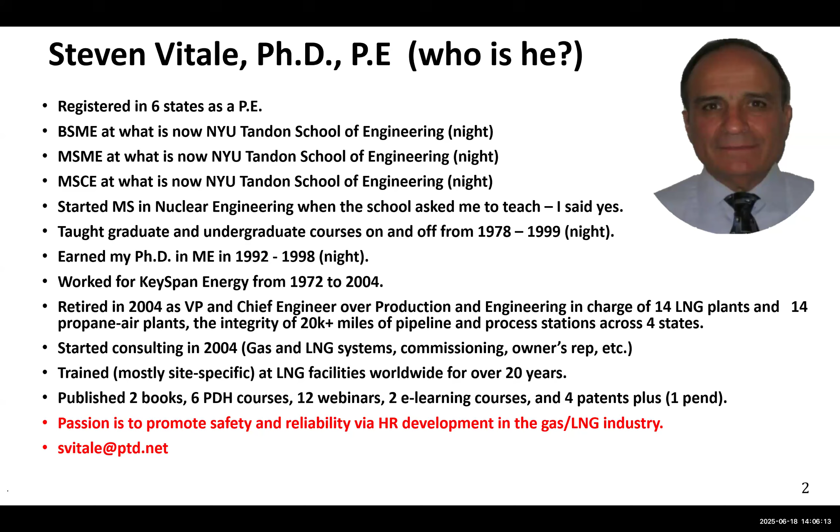And if you think about it, there was no real hazard. Even if it caught fire, there's nobody in the trench, and we have a big fire. You make an opening away from the trench, shut off the gas supply, the fire goes out. So my key in this presentation will have a string of safety requirements as I go through it.

Let's talk about LNG. Why do we want to know about LNG? What is it? It's liquefied natural gas. How do I make LNG?

Let's say I have a container that has natural gas in it, and I chill it down. As I chill it down, it gets more and more dense, and eventually becomes a liquid. But there's a problem with just doing that, because some things will freeze up on your heat exchangers, like CO2, water vapor, H2S, and heavy hydrocarbons. So you have to clean it up. That's called pretreatment. You clean up the natural gas and then you can refrigerate it.

How do you refrigerate it? The same way you do air conditioning, using a refrigeration process. Can you do it in a single refrigeration process? Not really, because you have to go from ambient temperature all the way down to minus 260 degrees Fahrenheit, approximately minus 160 C.

We'll talk about liquefaction systems and LNG tanks. LNG tanks are nothing more than highly insulated tanks. We'll talk about valves, pumps, vaporizers, and other equipment. Bog is something you'll hear me talk about quite regularly.

Bog is boil off gas, and bog happens continuously. Why? Because we're not continuously refrigerating the LNG, and heat is always leaking into your LNG tank. So the LNG tank is continuously boiling off.

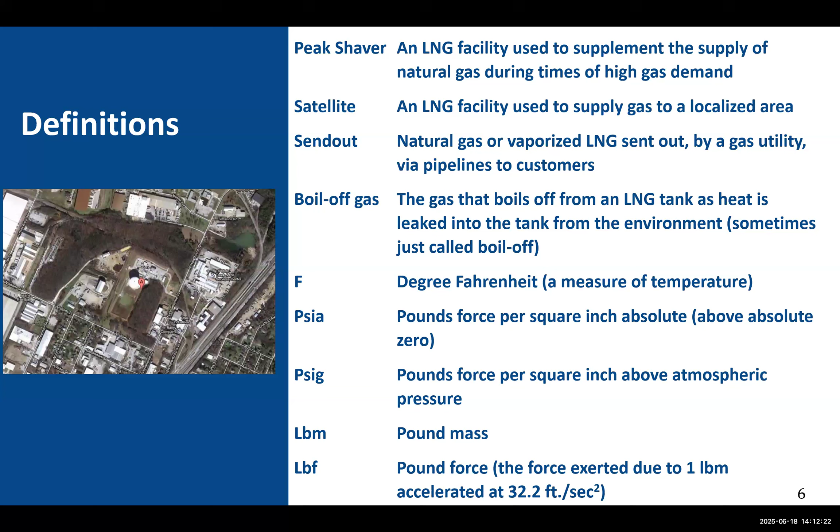When I step on a scale, though, it pushes down on the scale with 174 pounds force, not mass. Because if I step on the scale in outer space, I read 0 force. If I step on the scale on the moon, it's about 1/6, so I'd be a little bit less than 30 pounds if I stepped on the scale on the moon. So you can see the difference between pounds mass and pounds force.

In the gas industry, we talk about a standard cubic foot. A standard cubic foot sounds like a volume measurement, but in reality it's a mass measurement. Why? Because if I give you a cubic foot, you can't tell me how many molecules are in it. But if I give you a cubic foot and tell you two intensive properties of what's inside of it—an intensive property being a property of the fluid that does not change when you change the volume—so if I tell you two intensive properties like pressure and temperature, I can now define how many molecules are in that cubic foot. So a standard cubic foot of natural gas is so many molecules of it, and you can calculate it out.

And why do I know that? Because of standard temperature and pressure. But I caution you, everybody measures standard pressure and temperature differently. If you go to a college or university, well now they'll teach it in SI terms, but in the gas industry, in the United States anyway, they tend to stay with the English terms. So 14.73 and 60 degrees Fahrenheit is STP, standard temperature and pressure, in accordance with the American Gas Association.

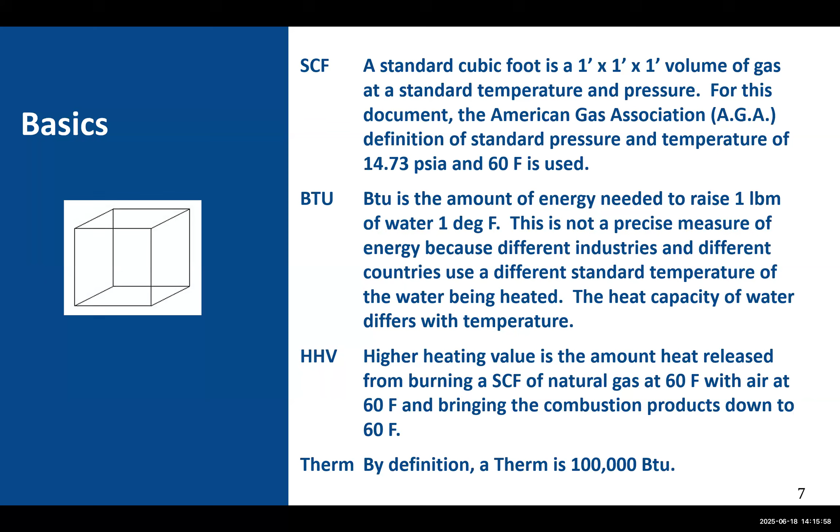By definition, a therm is 100,000 BTUs. Now, the gas industry is a bit of an oddball in its measurements. We use a decatherm, but it's spelled D-E-K-A, while everyone else uses deca, D-E-C-A. So you'd say decameter or decaliter, but in the gas industry we use DEKA, a decatherm. The difference is one is derived from the Greek and one from the Latin. I believe DEKA is from the Latin and DECA is from the Greek—I'd have to check which one is which.

The other oddity about the gas industry and its measurements is that every other industry uses K to mean 1,000, but not in the gas industry. In the gas industry, we use M to mean 1,000. So if I said 1,000 decatherm, it's an MDTH. Or if I said 1,000 standard cubic foot, it's an MSCF, 1,000 standard cubic foot. Now, many people in other industries use M to mean 1,000,000, but in the gas industry, it's 1,000.

So how do we say 1,000,000 standard cubic foot? It's an MMSCF. Kind of strange, but that's the way it is. A BCF is where we change to normal nomenclature. We call it a B standard cubic foot, so it's a billion. A gallon is an imperial unit, about 7.48 gallons in a cubic foot.

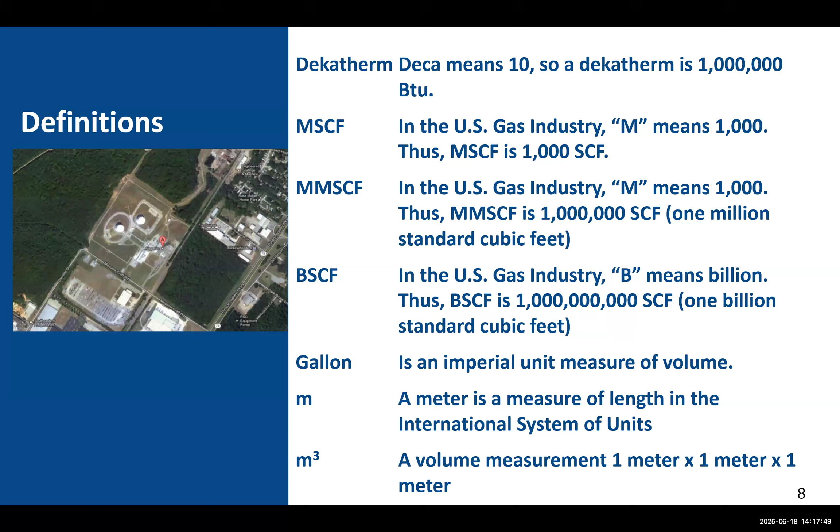Another type of measure we use, especially in transporting LNG, is a cubic meter. Then there's a normal cubic meter, very similar to a standard cubic foot, at normal temperature and pressure. Then there's a barrel. There's two types: a wine barrel, which is 32 gallons, and a petrochemical barrel, which is what we use in the LNG industry, and that's 42 gallons.

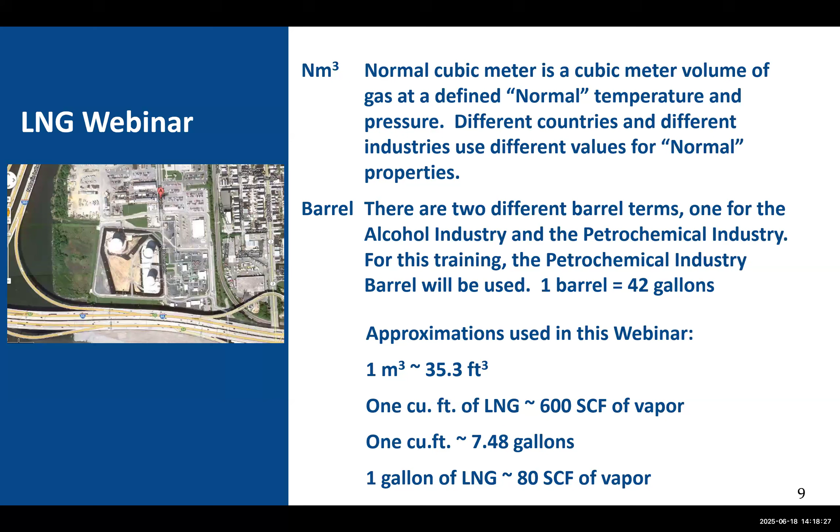So if I said I had an LNG tank that was 1,000,000 barrels, that's 3.3 billion standard cubic feet, or 42 million gallons. Then here's some approximations that you might want to keep in the back of your head, or keep as a reference. I put them there.

We manage a lot of energy. Let me give you, for instance, most LNG tanks are in the order of magnitude size of a 1 BCF. Now, import and export terminals may have 3 or 4 BCF per tank, big tanks. But most of the peak shavers, and I'll explain what a peak shaver is, use about a 1 BCF tank.

Well, that's about enough fuel to heat your house 24 hours a day, 7 days a week, for about 1,000 years. It's enough energy for you to drive your car around the world 6,600 times.

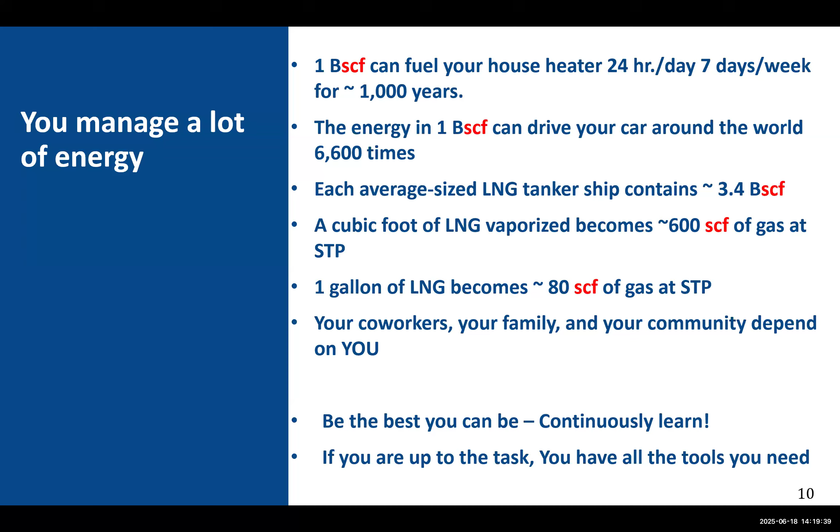Each average size LNG tank, as I just mentioned, is 1 BCF. An average LNG tanker ship carries 3.4 BCF. A cubic foot of LNG, when you vaporize it, grows to be 600 standard cubic foot of vapor. 1 gallon of LNG is about 80 standard cubic foot of vapor at STP. You and your coworkers deal with one heck of a lot of energy.

So I mentioned the word peak shaver. And what's a peak shaver? Well, let's say we live in the Northeast, and many of you are from New York. So let's say you live in New York. Where does the gas come to you from? It comes from Texas, mostly Texas and Louisiana, and about 20% of it comes from Canada.

You may not realize it, but the gas you actually see may be all from Pennsylvania. Even though it's coming from Texas and Louisiana, and you're buying it there, it's stored in Pennsylvania and shipped during cold weather. So the whole natural gas grid is a grid that everybody's inputting into and other people are taking off of. Whose molecule you're actually getting doesn't really matter.

Down in Texas, they may put in 300 million molecules. Up in Canada, so many. You are pulling off of this grid. You may have a contract with a company in Texas, but in reality it doesn't matter. You're just taking off the grid, I call it the grid, but it's really pipelines.

But what happens on the really cold days, like when it's 0 degrees outside, you can't push enough gas through that pipeline. So you have storage facilities, which are essentially underground storage capabilities that allow you to pump gas in during the summer and then take it out during the winter when you need it.

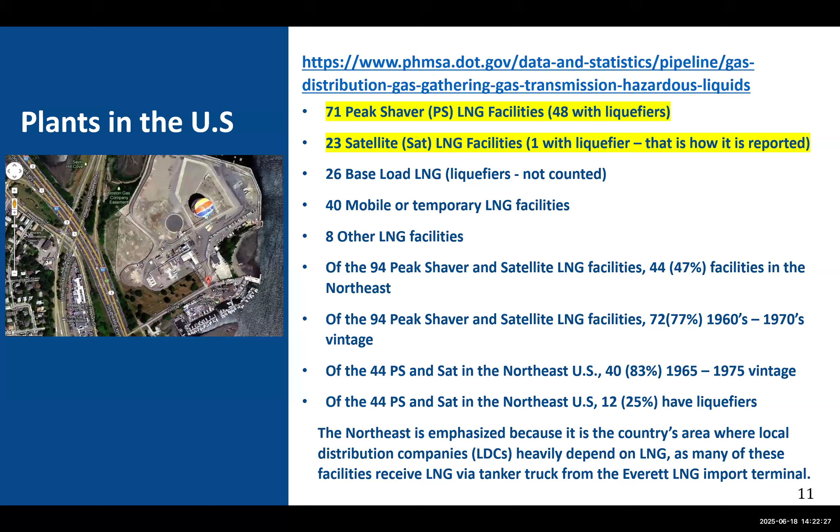A satellite facility would not have a liquefier. You can see there are 23 satellite facilities, yet one of them is listed as having a liquefier, so that technically would not be classified as a satellite facility by definition. But this is actual data reported by the companies to PHMSA, and PHMSA has this data available. The link I left you allows you to go onto the PHMSA site and download this information.

I'm not moving fast enough, so let me get myself in higher gear. Where does gas come from? The easy gas comes from conventional gas wells, where there are pockets of gas underground.

Then there are conventional associated gas wells. This is a gas well that has both oil and gas in it, and you have to separate them. In the beginning of the industry, they were always looking for oil. Gas, nobody sold gas. It was a nuisance to the oil drillers. They would drill, hit gas, burn it off, and get down to the oil.

But now, around the 1950s or very early 50s, pipelines were spread from Texas and Louisiana up the east and west coast, and all of a sudden, natural gas became available to places like Baltimore, New York, Boston, etc. And since then, those pipelines have been expanded, and the sale of natural gas has become a massive industry.

In fact, about a third of the energy used is natural gas, and we're converting many of the oil and coal-fired electric generating stations to natural gas. So demand for natural gas has increased, so much so that new technologies have been used. One of those technologies is directional drilling.

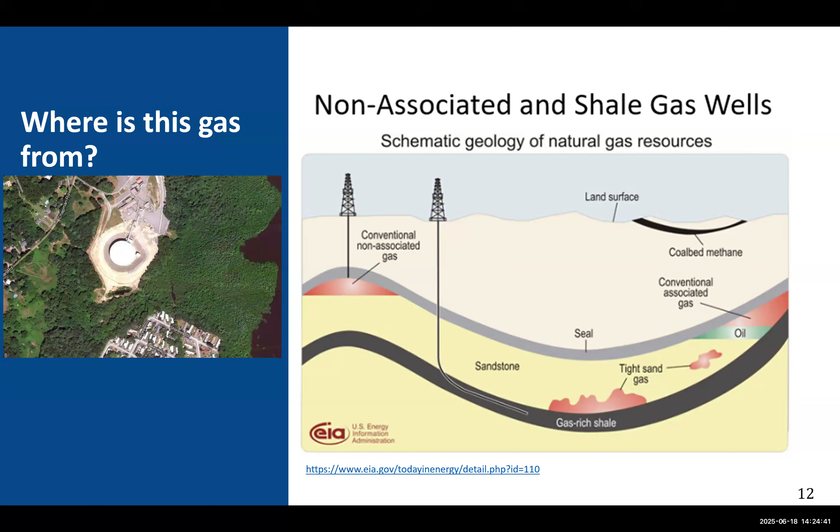There are tremendous amounts of gas hydrates under the ocean. They don't know how to extract that yet, but I'm just saying there's plenty of gas.

How do you frack a well? Typically, here's a well site, and there'll be 6 pipes coming down, spread out, 3 in this direction, 3 in the other direction. Then they will block it off and explode pellets or bullets through the piping, which puts holes in the piping. Then it pumps down very high pressure water, which fracks the shale. Fracking means cracking the shale.

And in that water are sand particles, which keep the cracks open, so that when you extract the water, the gas in the shale follows it and comes up. First you get the water out, then you start getting gas, and it keeps coming and coming. I've been on a couple of these shale sites, and they're amazed at how much gas comes out of the shale. It just keeps on coming.

So this has been a revolutionary technology. How does gas transport? Typically through pipelines. This is an EIA map of the major pipeline network in the United States, showing transmission piping. There's about 300,000 miles of transmission piping and about 1.3 million miles of distribution piping.

Distribution piping is the pipe outside the front of your house that delivers gas to your house. Transmission piping is the high pressure piping that takes the gas from the production centers up to the high use centers, or what we call the load centers, like New York, Boston, Baltimore, etc.

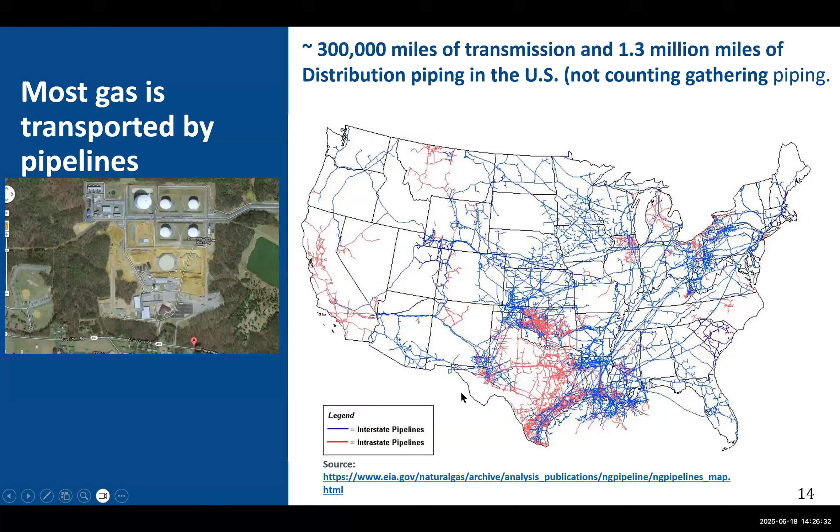LNG is nothing more than natural gas that has had its contaminants taken out and then chilled, and it becomes about 1/600th of the size. That's why it's stored as LNG, because it's a very dense concentration of energy. When is LNG used?

It's used when there's not enough gas coming up the pipeline, and you now have to supplement the pipeline supply with vaporized LNG. How do you vaporize LNG? Take the LNG, add heat, it turns back into a vapor, continue heating it till it's around 40 degrees Fahrenheit, and then you put it into the pipelines, and it goes out to the customers.

Customers don't see any difference between natural gas and LNG. The only thing that happens, though, is when you liquefy it, you're actually taking the odorant, the smell, out of the gas. So you have to put odorant back into the gas. When is it used? When there's not enough gas coming up the pipeline.

Also, when you want to take stranded gas - let's say I have this great gas supply in Alaska, and you want to get it to some other country. Well, how do you get it there? You put it on ships. In fact, the first LNG export facility in the United States is in Kenai, Alaska, and it was built to take LNG from Alaska and ship it to the Pacific Rim countries.

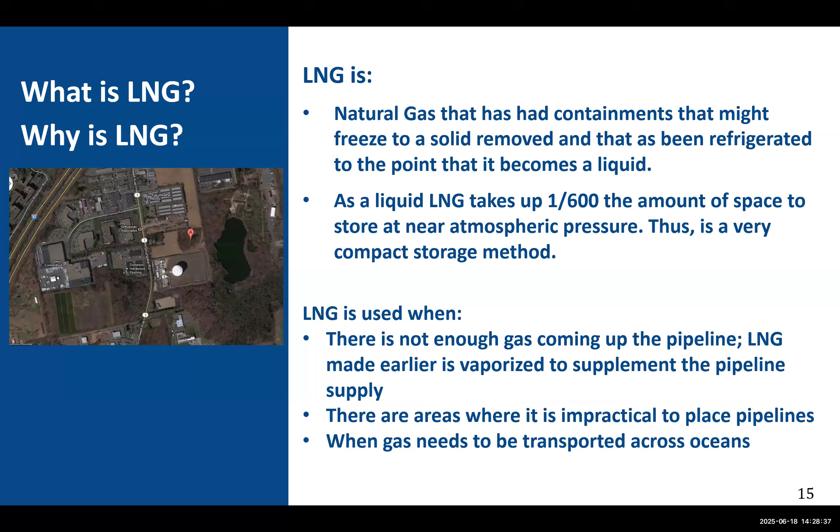I'll call them the Pacific Rim countries that need natural gas. Japan, for instance, a major industrial country, has no indigenous natural gas. They import every drop of natural gas in the form of LNG. LNG is used when there's not enough gas, and also when you have to move stranded gas to other locations.

What is a major component of LNG? What are the major components of natural gas? The major components are methane, typically over 90%, ethane 3 to 8%, propane around 1%, even some nitrogen. Typically natural gas will have a little bit, maybe up to 1 to 2% nitrogen. LNG will typically have some nitrogen liquefied when you first make it, but after a couple of months, all of that nitrogen has boiled off preferentially.

So it's flammable. If I took 1 cubic foot of LNG, it would produce about 630,000 BTUs of energy when burned. Think of it this way: a cubic foot of natural gas is about 1,030 BTUs of energy when burned, and 1 cubic foot of LNG makes 600 cubic feet of vapor. That's where I get this 600 to 630... 1 cubic foot makes 1,030, 600 cubic feet makes 630,000 BTUs of energy. It's about a 600 to 1 ratio, essentially.

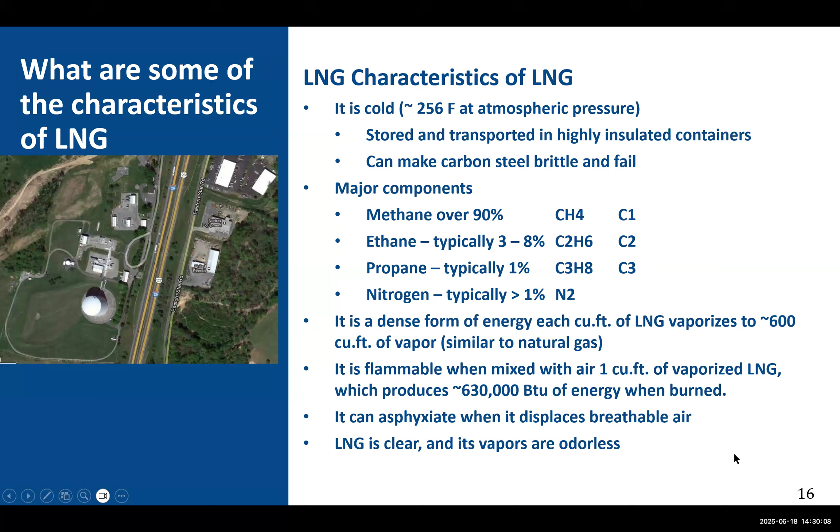LNG is odorless, so you have to watch out. Nitrogen is odorless too, so you have to watch out. I say that intentionally because if you're in an environment with low oxygen concentration, you will pass out, and if it's low enough, you will die. I remember interviewing people who were overcome by a nitrogen gas environment, the 5 people who survived that accident. Many of them said they pulled their shirt up over their face and went in to help their fellow workers who had fallen. Originally 2 workers fell, 2 others jumped in, pulling their shirts up. But pulling your shirt over your face in an oxygen deficient environment does nothing. That's a myth people don't realize.

There are a couple of other myths, and that is that LNG vapor is nothing more than natural gas, and since natural gas is lighter than air, LNG vapors will rise up into the atmosphere. I've heard many PR people from the gas industry say that. It's not true. Here's why: the LNG vapor is so cold that it's dense—actually denser than air.

It's minus 260 degrees Fahrenheit when it boils off. So you have the liquid at minus 260, the vapor at minus 260, and as the vapor travels, it hugs the ground until it warms up. When it gets to be around minus 150 degrees Fahrenheit, it's just about buoyant with air. Then as it warms up more, it becomes buoyant with air.

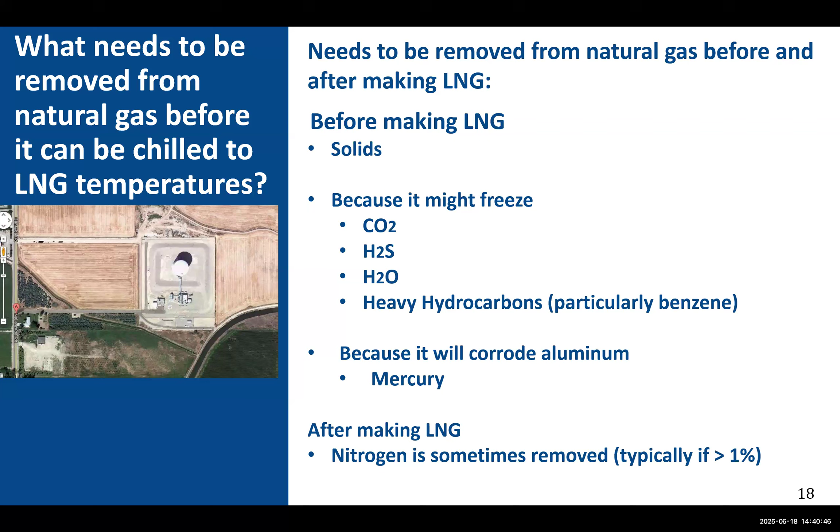But if I put a drop of mercury on an aluminum plate and then have this presentation, by the end of the presentation, I could show you that drop of mercury has corroded a big gouge in that piece of aluminum. So you've got to take out the mercury as well. LNG vapor and combustible mixtures—we're going to talk about that next.

Now, this is an AI screenshot. I want to put that there because I didn't have—go back one—I do have an actual picture behind me, but it's not one that I had rights to, so I just put up an AI picture. It just shows that LNG, when it vaporizes, you see a white cloud.

Now, what is the color of the vapor? It's not white, it's clear, you see right through it. What are you seeing when you see a cloud from a vapor cloud that comes off of LNG? You're seeing the water that's in the air condensed. So what you're really seeing is condensed water vapor in the air. The actual cloud of vapor is odorless and invisible, but because it's so cold, you get to see this cloud of water vapor. The cloud hugs the ground—that's the important thing to remember.

Now, in an LNG plant, you always look at the windsock to see which way the wind is going, because all of the theoretical work that's done is based on certain wind conditions, and you'll see what's called isopleth. Isopleth is a plotting of radiation heat transfer, and I'll show you a couple of those. But you don't want to be downwind of a gas leak or downwind of an LNG spill—you want to be upwind of it, and I'll show you why momentarily.

So let's say we did an isopleth for this spill. Well, it would show you a circle that says, okay, if you're anywhere within this range, you're safe, but not if you're here, really. So you've got to know your wind when you're in an LNG facility.

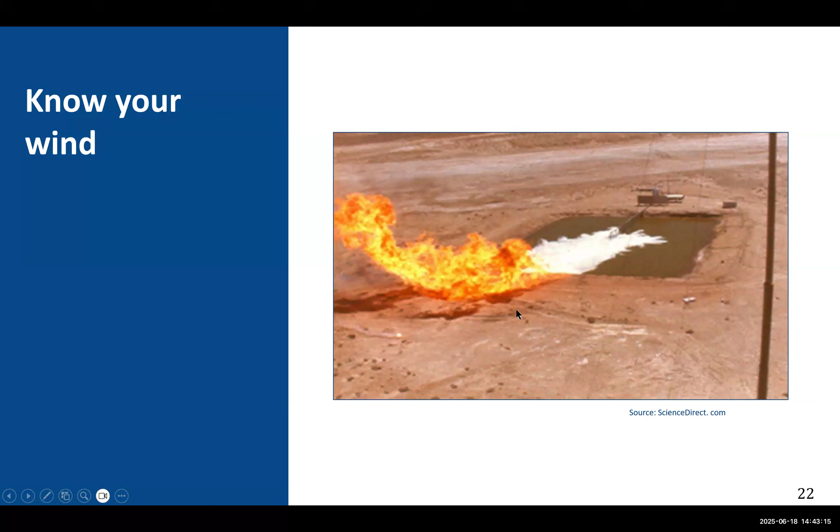And I know one person who was doing an experiment, and he was downwind, and the flame was over his head, and he said, 'Wow, I've got to rethink the experiment that I'm doing.' So you could see how knowing your wind becomes extremely important. Always keep your eye on that windsock when you're in an LNG facility.

Vapor and flame characteristics. Now, if a vapor cloud goes all the way out over here and gets ignited, you'll see the vapor cloud get ignited here, and then the flame move on back until it's right over the pool. That's a deflagration—it means it's a slow burning flame front that starts at one point and then carries its way back to its source of LNG.

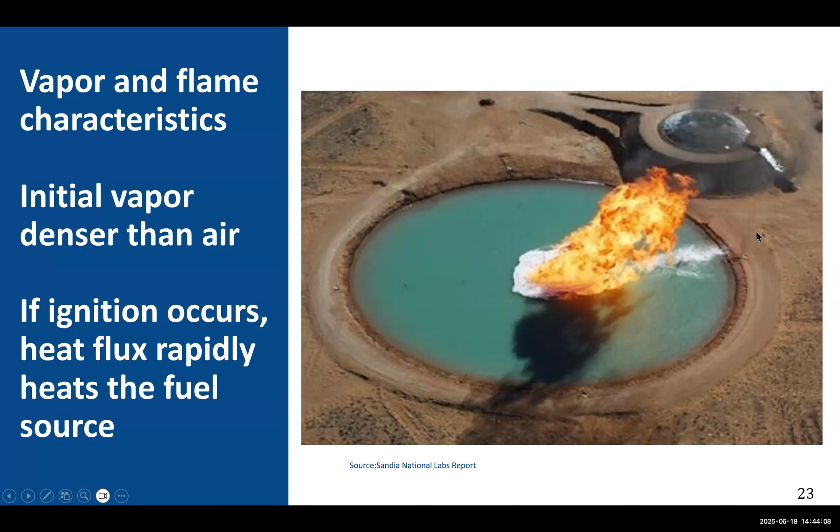And you can actually have, if the wind is strong enough, the flame over here, and if the wind is, let's say, the same velocity as your laminar flame speed, you'll have a flame over here and a vapor cloud over here. Your flame will be staying behind. So you know your wind direction. A lot of what we do in the gas industry is purging out things to be safe.

If you get enough oxygen out of a vessel, and there's very little oxygen left with some gas in it, you strike a match and nothing happens—no explosion. So you do purging, and there are ways to do it. The most convenient way is, if I have to get this vessel emptied of whatever's in it, I move this and get it emptied out.

If I put a liquid in, I'm going to do a displacement purge and get all the vapor out. But you can't really do that with LNG, because water will stay behind, or water vapor will be left that crystallizes within your LNG. So we have to use a gas—typically nitrogen—for purging.

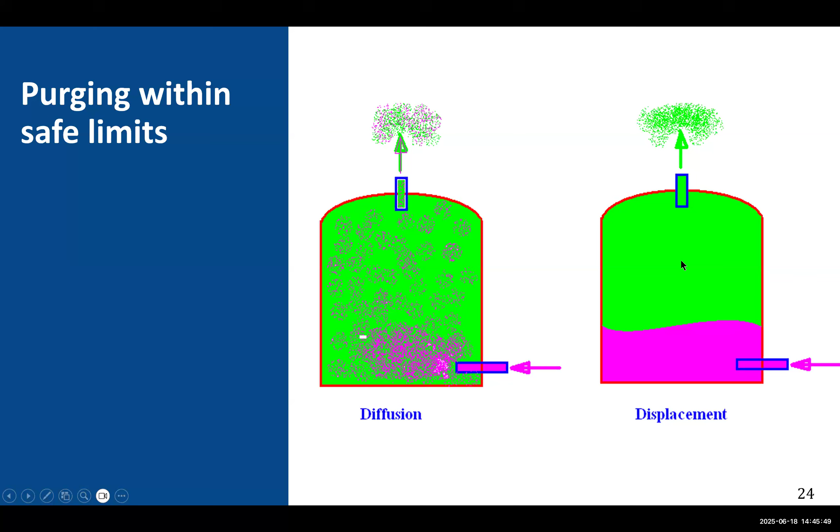It's a lot harder to purge with nitrogen because you have to depend a lot on diffusion. You can trick the natural gas by making the nitrogen cold, but you have to be careful not to make it so cold that any water vapor in the air drops out as liquid. So you want to first use warm nitrogen. Once you get a layer of nitrogen, you can start bringing in cold nitrogen to try to get a displacement purge. What you want to avoid is channeling.

Channeling is when you take a reading up here and say, 'Hey, I got all the air and gas out of my vessel, and I'm ready to bring in my other component.' Let's say the vessel was filled with air, and since I just constructed it, I want to now bring in natural gas. Before that, I push nitrogen through here. I take a measurement and say, 'Okay, I'm coming out at 95% nitrogen—good, I'm all purged out.'

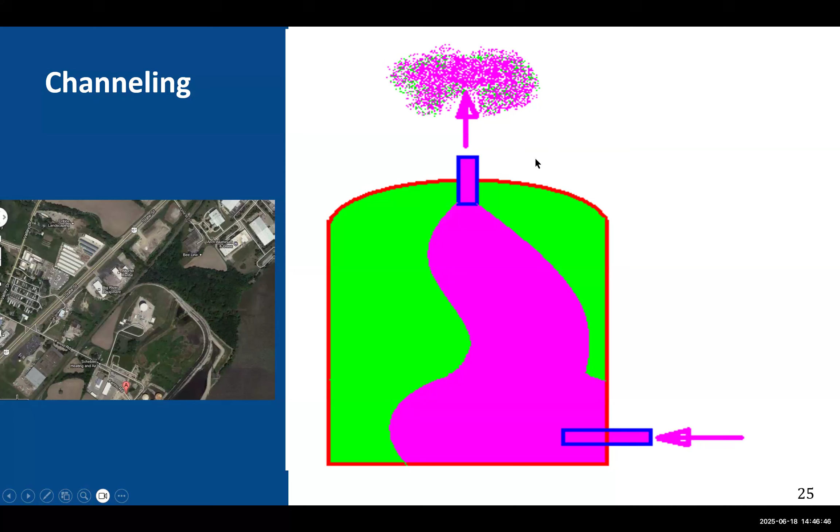In reality, over here you might have 10% oxygen, and here only 5% oxygen—you think you're fine. But over here you might have 12 or 13% oxygen. So what you do is stop your purge, wait for diffusion to take place, then restart your purge and recheck your composition.

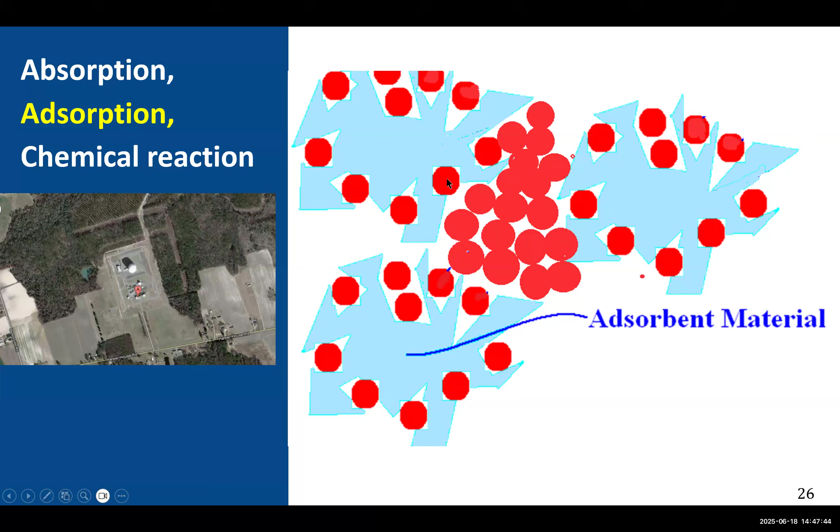One of the problems is that perlite, one of the insulators we use in insulating the tank, acts as an adsorbent, meaning it has many small crevices. Adsorbents are used intentionally to remove water vapor from gas molecules. Perlite isn't intended to be an adsorbent, but it's a very good insulator—it tends to capture gas molecules within its crevices, because perlite is just solid material that's heated and popcorned apart into a fine powder. But that powder has crevices that can adsorb natural gas. So if you purge out a vessel or insulation area filled with perlite, you have to be careful because you're really not getting all the gas molecules out.

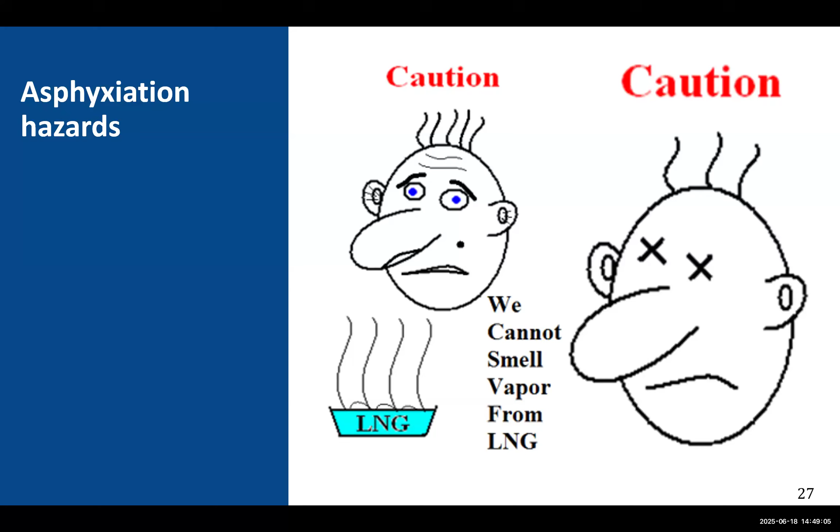But keep in mind: your lungs are nothing more than a big semi-permeable membrane with a lot of surface area, allowing oxygen to go from the high concentration side to the low concentration side. So if you take in a breathful of nitrogen, what happens is not just that your hemoglobin stops getting oxygen—worse, the oxygen already in your hemoglobin will leave it and go into that nitrogen. So you can actually have an instant collapse from nitrogen or natural gas.

In 1979, liquid natural gas seeped through a seal in a pump. A pump is essentially a can that has LNG in it with a submerged pump and a wire coming out. There's a seal to prevent the LNG from going past the wire, and that wire then goes to your motor control center. The LNG seeped past the seal and went into the motor control center.

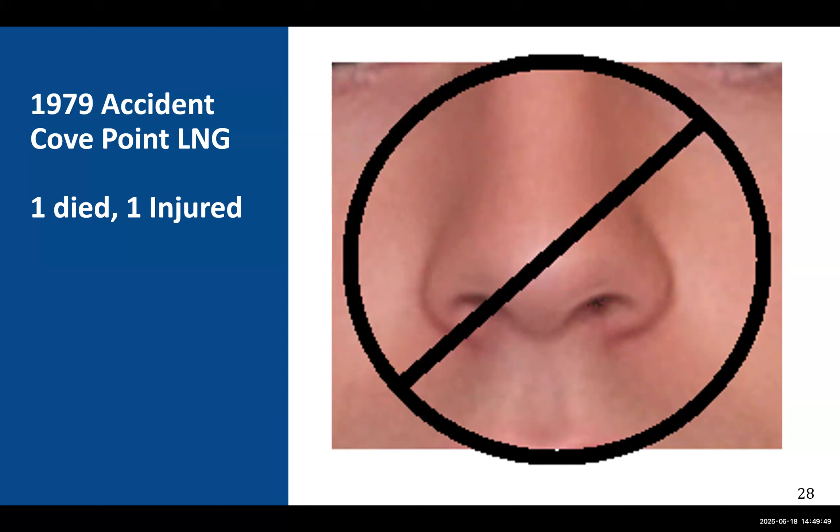And because it's odorless, remember LNG has no odor, the operators didn't smell the boil-off vapor, and there was an explosion. One person died, and one was injured.

Now, talking about oxygen concentration, the air that we breathe is 21% oxygen. If you have excess oxygen, you can have a fire take place very rapidly. That happened in one of the space capsules where three astronauts were killed. They had a very high oxygen concentration in the capsule. A spark started, and the insulation burned very rapidly.

I remember one time as a stupid kid putting a cigarette into a stream of oxygen, and I went like that, and the cigarette literally just exploded. It was incredible, but stupid kids do stupid things.

On a loss of oxygen, if it's not all the way down, you start getting a decrease in motor skills, but worse than that, you have poor cognitive abilities, and you can make really wrong decisions and not even realize you're making wrong decisions. So you have to watch the oxygen content whenever you're in a confined space or whenever there's a possibility that you're in an area that has less than 21% oxygen. The minimum allowed by OSHA is 19.5%.

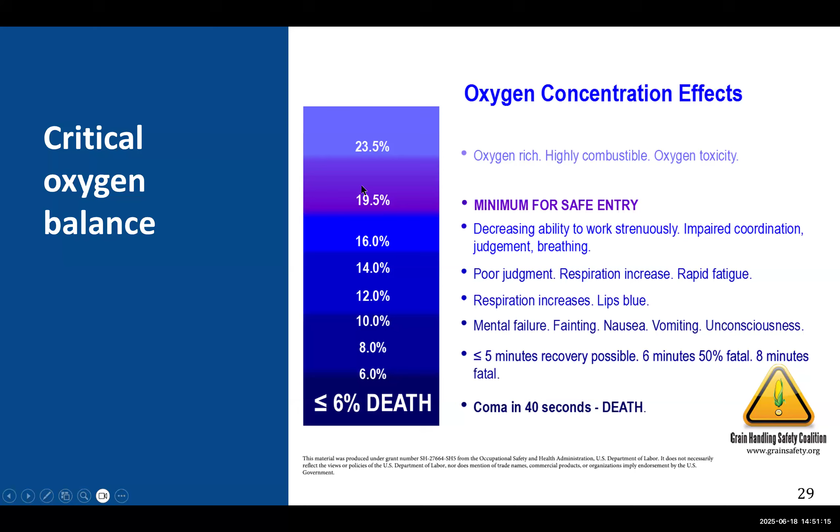And the cloud is initially heavier than air.

Water hammers. You've all heard water hammers probably in a house. If you slam a valve shut real quickly, boom, you hear the piping shake. What's happening? Let's say this is a ship loading line and you're moving many, many thousands of tons of LNG towards the ship or off the ship, and you quickly shut a valve, bam, that liquid has to stop. You're stopping tons of liquid. So you get the hammer packed right into that valve. Due to what's called the Joukowsky equation, you can get a shock wave that travels backwards down the pipe, at that same pressure all the way back down the pipe to the source. Now it depends on the rigidity of the piping, but that's a water hammer.

It's a Joukowsky type of water hammer. Another type of water hammer would be a condensation water hammer. Let's say I'm operating this pipe at 1200 psi. This is a warm dead leg. If it goes to a low pressure, let's say you get an emergency shutdown, all of a sudden this vaporizes. Now I restart the pump and this liquid starts coming down this pipe and it's condensing this vapor until all of a sudden it hits the end of the pipe, like having a valve that slams shut. You have a condensation water hammer.

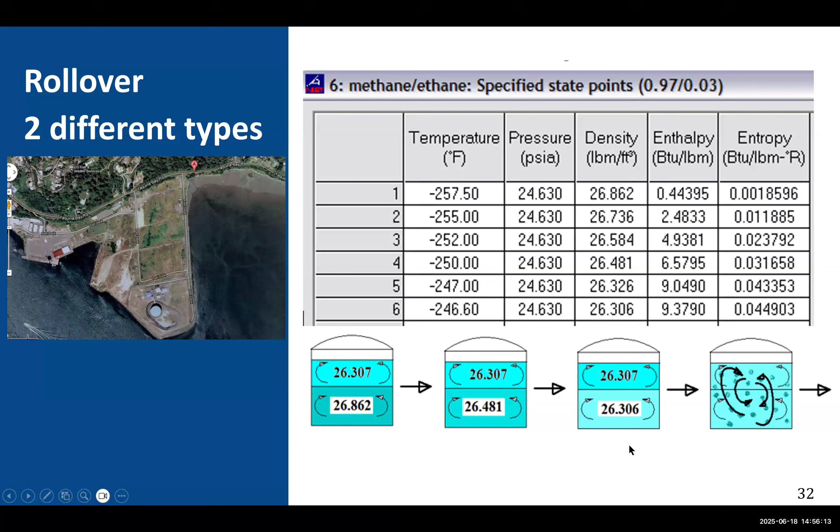If I ask you a question about stratification, what can stratification cause? It can cause a subsequent high amount of boil off, and it can also cause this phenomena, which is called a rollover. And it can happen two different ways.

Fill-induced rollover... somebody's talking in the background. Please keep it down, or mute your mic.

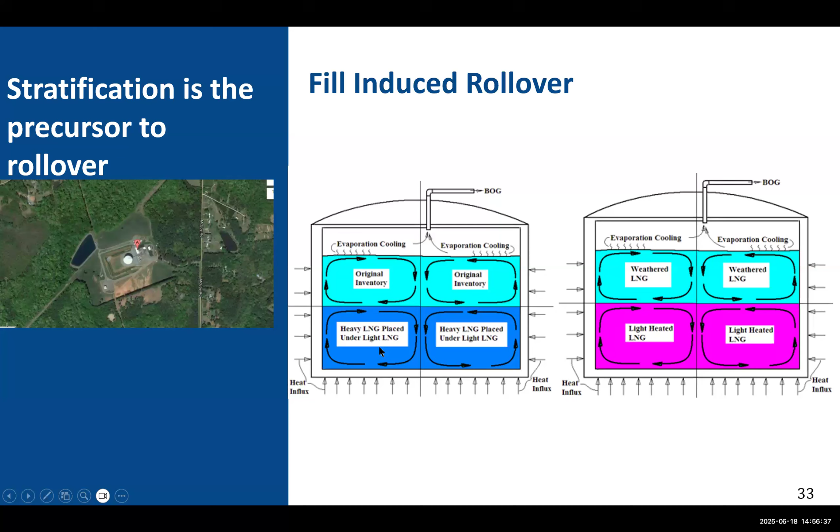You can get a fill-induced rollover where, like we said, you put a heavy LNG under a light LNG, or you put a light LNG under a heavy LNG, and the rollover is what follows.

One of the things that happens in a rollover is a runaway case, because as this warm LNG starts to rise, it starts to boil, and then this bulk density becomes even lighter. As you can see, it's almost like a geysering effect. It'll really cause this bottom LNG to rise to the top very quickly.

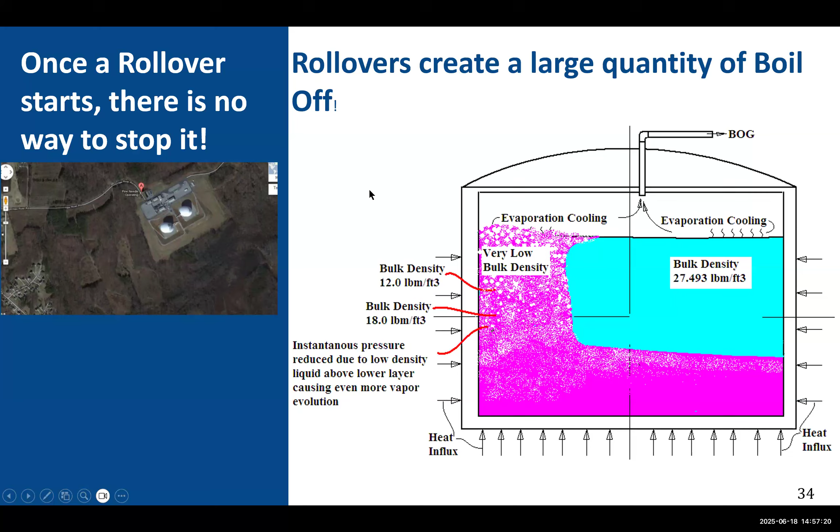No one really knows whether it flips or whether it mixes, but we do know the end result. By the way, these pictures on the side are just random pictures I took off the internet, off Google Earth, of different LNG facilities. There are three types of tanks used to contain LNG.

One is called a single containment tank, which is nothing more than an open bucket of cryogenic material. Typically it's either aluminum or 9% nickel steel. The majority of tanks are 9% nickel steel, though there are some aluminum tanks out there.

Why is it called single containment? Because this outer tank doesn't contain anything, since it's carbon steel. If the LNG hits it, remember what happens to carbon steel? It cracks. So if you have an inner tank break, the outer tank will automatically break, and you're required by code to have an impound basin around the tank.

That's a single containment. A double containment tank has a wall real close to your tank, maybe 6, 7, 8, or 10 feet away. If you have a spill, your vapor will still release to the atmosphere, but you have a very limited amount of liquid in contact with these hot surfaces.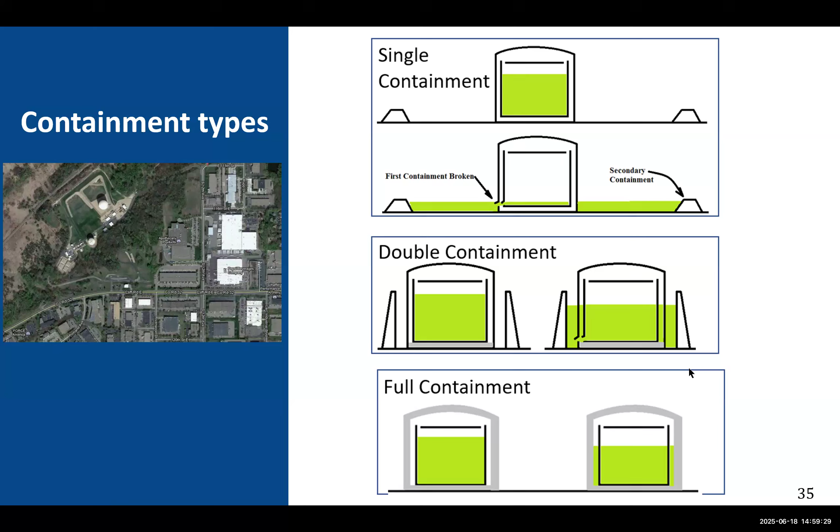Here you have a tremendous amount of surface area and a tremendous amount of boil off. Here you get a much smaller amount of boil off. Then a full containment tank, as shown here, is where both the inner and outer tank are cryogenic material, able to withstand cryogenic liquid without spilling. So in a full containment tank, neither the vapor nor the liquid will be spilled.

What is the amount of liquid that boils off in a tank? Important question, because you might be asked it. It's 18% a year, or 18.25% if you calculate it based on 0.05% per day times 365, which gives you 18% per year.

So let's say I fill my tank up to 100% of its working capacity, and you never actually bring it up to the brim, you have a certain cushion amount here. That's for seismic reasons as well as other reasons, which I'm not going to get into at this time.

It would be too complex for this level of class. But once I get into this situation, I come back a year later and find I only have 82% of my LNG. What happened to it? It boiled off during the year. That's something to keep in mind when you consider a peak shaving facility.

Now what also happens is weathering. We don't have time to get into it fully, but the methane preferentially boils off first, so this becomes higher and higher in concentration of ethane and propane. The BTU value goes up. If it goes up too much, you're no longer interchangeable.

There are different types of tanks. This one happens to be a single containment tank. You have the tank, and then the outer dike. This one happens to have two dikes — it chose to put two dikes in. One dike is required by code. They also chose to put insulating concrete in here.

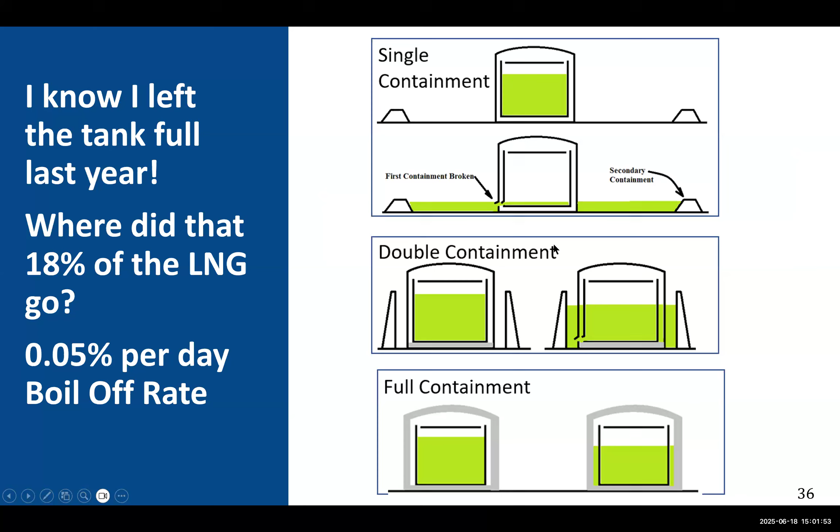What is this? There are some tanks, not too many, where the annular space I said was filled with gas — they fill it with nitrogen instead. They seal this gap between here and here and fill this annular space with nitrogen. It has in it a breather tank that's nothing more than a rubber bag with a weight on it that just keeps a positive nitrogen pressure on this.

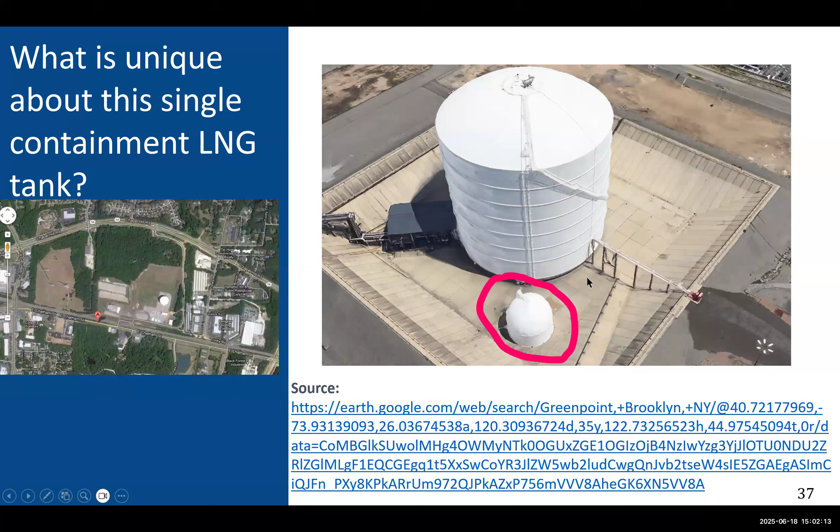Why do you need this? Because the barometer changes. As the barometer changes, you need to make up or take away nitrogen from this annular space to account for barometer changes.

These are full containment tanks, so these concrete tanks can hold LNG as well as the inner tank, which is made of 9% nickel steel. I worked at this plant as well, and at the other plant we just looked at. These can hold your LNG inside the inner tank. If the inner tank were to fail, the outer tank holds the LNG. There's no berm around these tanks because they're full containment tanks.

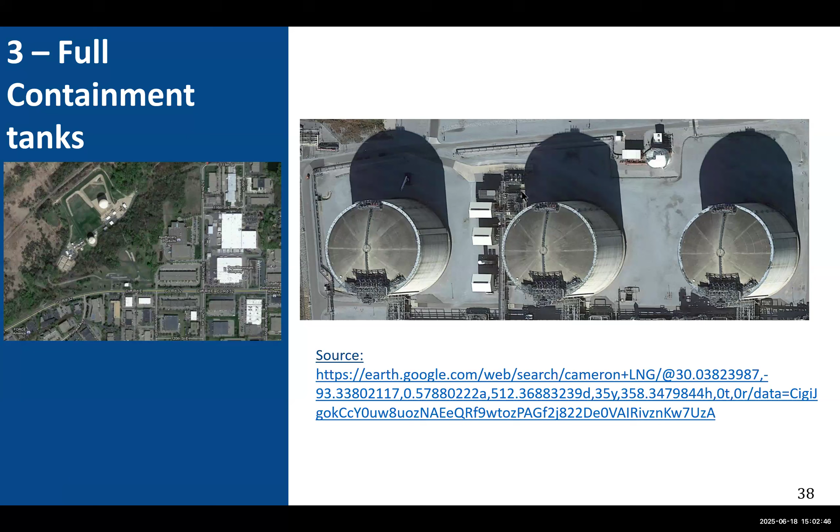You have a way to put LNG into the tank, a way to take vapor out of the tank, etc. When you're dealing with LNG measurements, you have to be careful to make sure the instruments are reading correctly.

Because if you pressurize this, think of a soda can — it can hold quite a bit of pressure. But if you have an empty soda can and you squeeze it, it crushes, like a plastic water bottle. Same thing — all of these tanks can hold pressure fairly well, but cannot withstand a vacuum. So you have to be careful that your outer tank never sees a vacuum.

Also, you have to be careful that your inner tank never sees a higher pressure on your annular space than in here. So when you're purging out an annular space, you want to be careful to always purge by pressurizing the inner tank and then taking the purge gas out the bottom here. This way you don't end up having it crush.

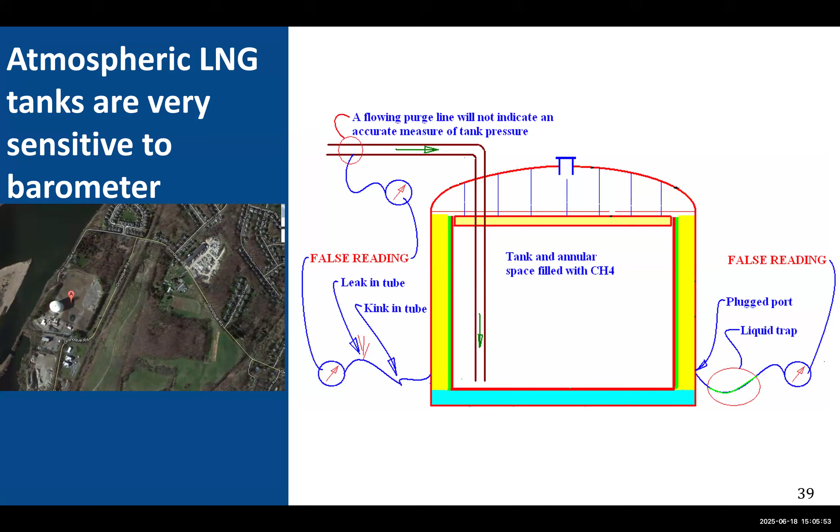Barometric pressure, a very real concern that very few people have much knowledge of. So I use the analogy of a spaceman. If I have a spaceman in a spacesuit and I keep him at 16 pounds per square inch absolute, I bring him out into outer space, the differential pressure between his spacesuit and the outside world is 16 psi. If I bring him up on top of Mount Everest, and Mount Everest is 4.4 psi absolute, his spacesuit is still at 16, but the differential pressure is now 11.6. If I bring him here on Earth and my barometer happens to be at 14.7 psi, my differential pressure is 1.3 psi. He's still at 16 psi. He doesn't know anything happened.

If I bring him into the lowest recorded pressure on Earth, which is in the eye of a hurricane, at sea level they were down to an absolute pressure of 12.8 psi absolute. That would be a differential pressure of 3.2 psi gauge shown here. So you see what's happening, the spaceman doesn't know anything has happened. He's gone through all these different places. If I bring him up to a place where the highest recorded barometer known is 15.7, that was somewhere in Siberia, the differential pressure here is only 0.3 psi.

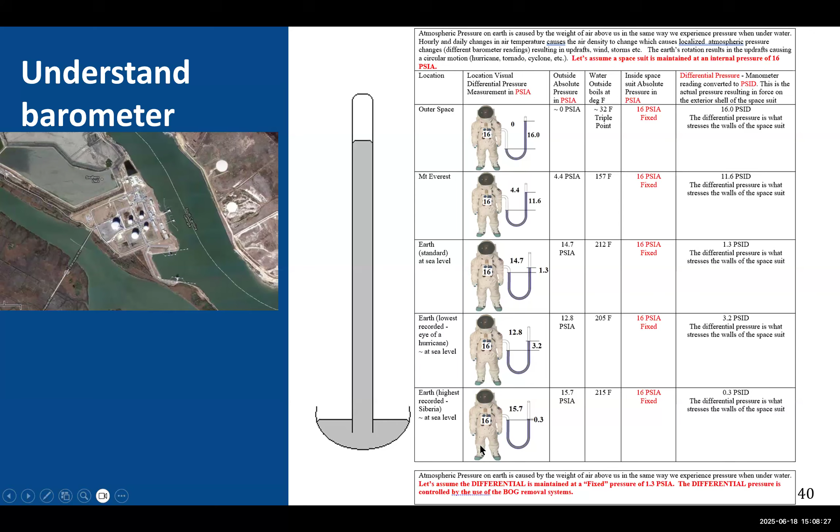So let's do this with an LNG tank. Here's an LNG tank, 14.7. He's got a point, let's say I try to maintain this at 1.3. If I try to maintain this at 1.3, this is now at 16 psi. If now the barometer drops real fast, I've got to pump out enough boil off from here to get this down to 14.1. You might think that's easy, but it's not, because keep in mind, the lower this pressure, the colder this LNG gets. The colder the LNG gets, the lower the pressure, the more boil off, more liquid that boils off. Where does refrigeration come from? It came from boiling off the LNG. And if I go to a high pressure, I now have to stop taking boil off out and let the heat leak bring that pressure up. Now, if I'm getting myself in a situation where I don't have enough boil off, there are safeties associated with that. There are safeties associated with both directions, too much pressure and too little pressure.

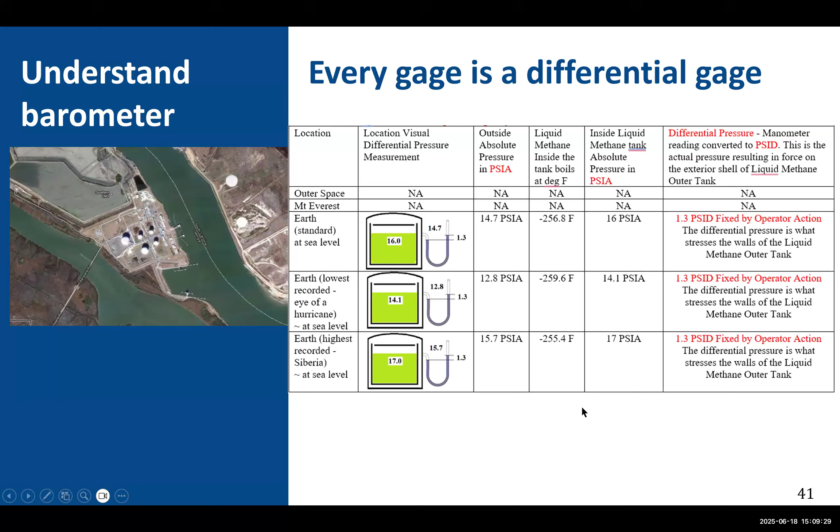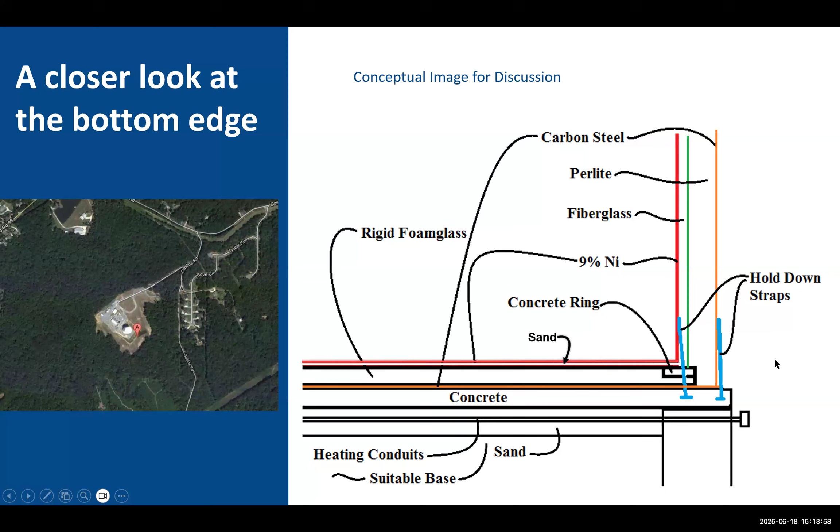I won't go over this because this is just an explanation of what we saw. This is a tank, these are actually two tanks, it's an import terminal. In fact, I live about a mile away from these tanks, and I took this picture myself.

This is an import terminal that was completely constructed in 1974, and the operating permit was pulled in 1975. The first commissioning ship, filled with LNG cargo, was en route to this location when the city of New York pulled the operating permit from this facility. It never saw a drop of LNG. Now, this facility in today's dollars would have been, I'm guessing at the number, maybe $6 billion with a B.

And it never saw a drop of LNG, and they still stand today, because these walls were made to withstand a 747 at 200 knots. These walls were made of reinforced concrete, where they wrapped wire cable around and sprayed gunite as they wrapped the wire cables around, and then added insulation.

These walls and structures, you're not going to take down very easily. It's not very expensive real estate, but again, you're not going to take them down very easily.

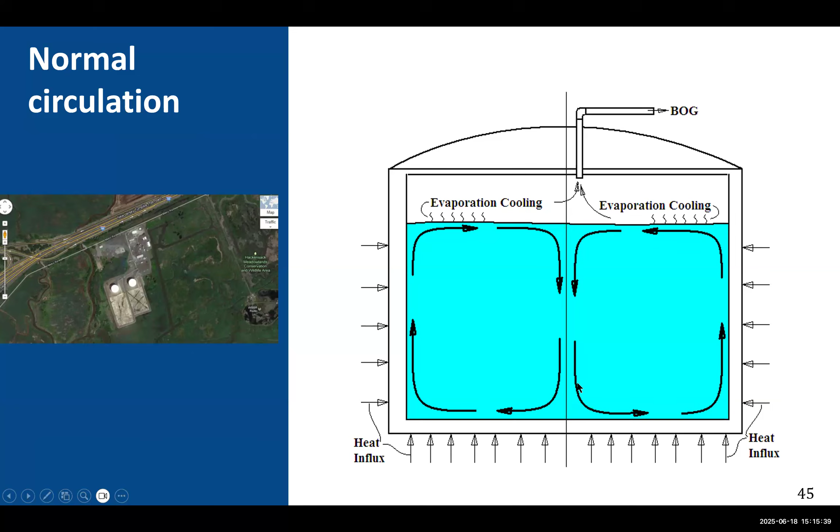This is the way a tank normally circulates. You have your LNG, it gets a little bit warmer as it touches the wall, comes to the top, evaporates, gets colder, becomes more dense as it becomes colder, and drops down to the bottom. That's a normal circulating tank, and this is what you're striving for.

A deeper focus on LNG safety. Anything you get on the internet, you have to wonder about its credibility.

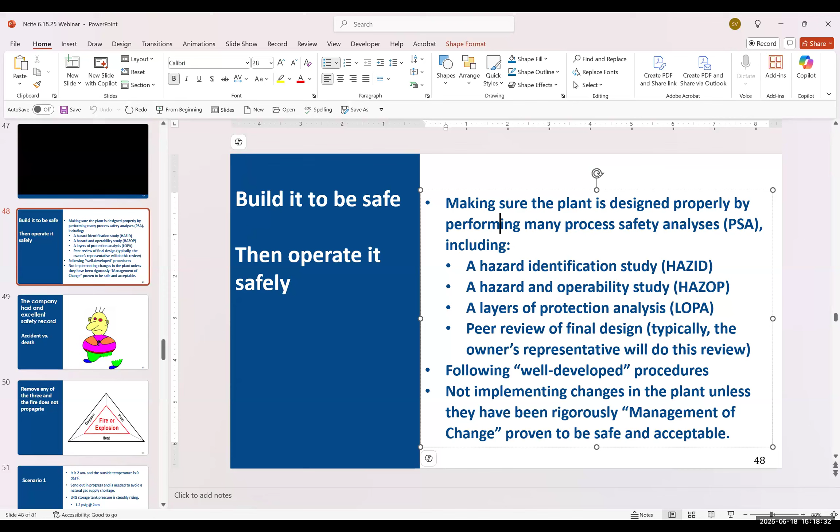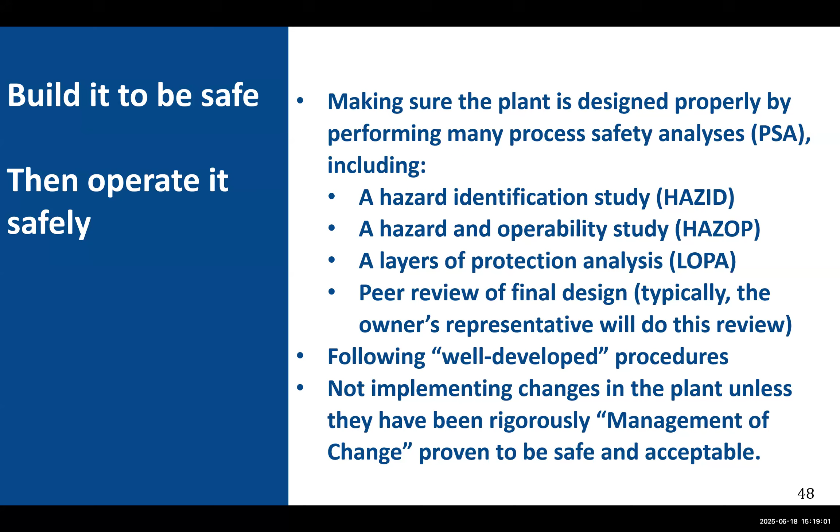Many different process safety analyses are done when you're building an LNG plant. You do a hazard identification, HAZOP which is a hazard and operability study, a LOPA which is a layers of protection analysis, and peer review. Many different PSAs, process safety analyses, are done.

One of the companies I studied had an excellent safety record, yet 15 people died in an accident. When I dug further, I found out they never counted deaths in their accident record because there was no lost time accident associated with the death - it was a death on the job. This was the Texas City refinery, and there's a video out on that. I would encourage you to watch it - it's 55 minutes long, but it really gets down to the root causes of accidents that I've seen in my 50 some odd years of experience.

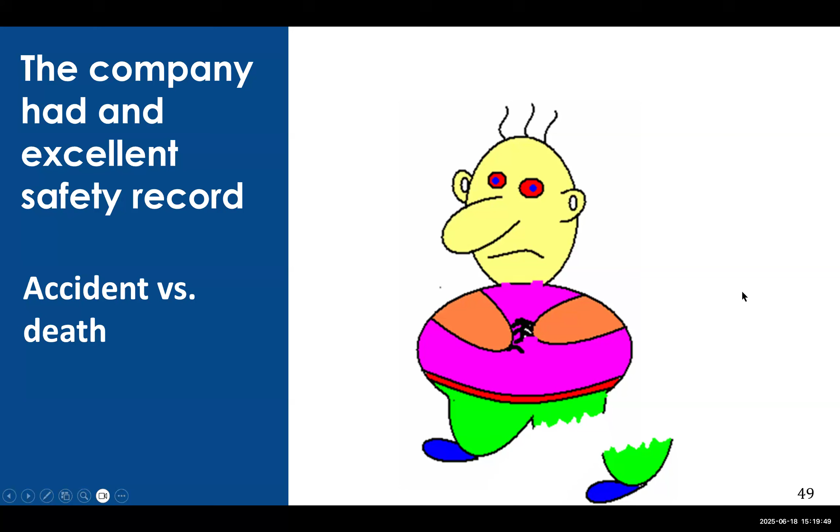So here's a scenario: you're on shift, you're the chief person in charge, it's 2 a.m. in the morning. Outside temperature is 0 degrees Fahrenheit. Send out is in progress and it's needed - send out means you're sending gas out. LNG storage tank pressure is continuously rising, at 1.2 psi.

So you see it's rising, so you put on more boil off compressors, you start taking gas out of the tank, but the pressure is still rising. At 1.7 psi, it's still rising, and you have no way of getting that pressure down. What could be causing this? I'm not going to give you an answer - there are many different answers.

We studied rollover - you could be having a rollover take place. There is a vacuum breaker called cover gas connected to your tank that says if your tank ever sees low pressure, it puts gas directly into the tank. Or maybe that's open. There are many different things that can cause this overpressurization. You could have a cold spot on your tank, or you could have LNG leaking out of the inner tank, touching the outer tank, creating boil off in that annular space.

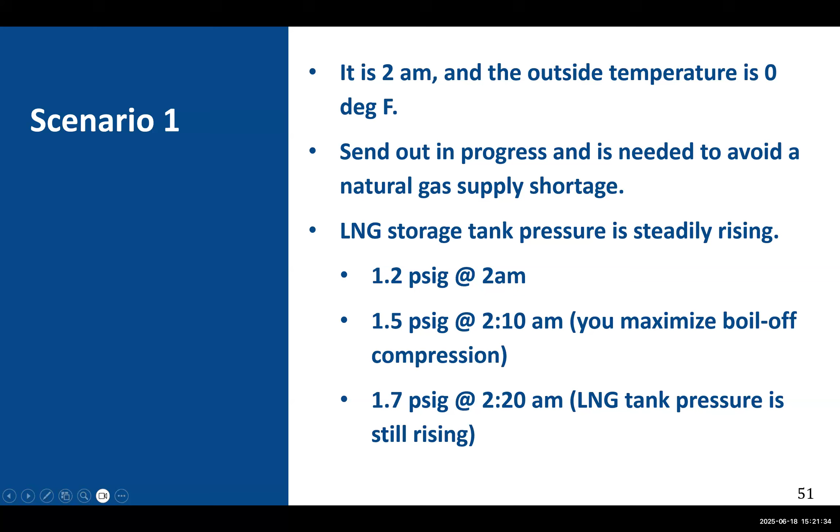There are many things that can happen, and I'm not going to delve into this, but these are the kinds of things you need to think about ahead of time. What will you do if that happens?

LNG is very cold. One time I was making up a fitting, and I had gloves on, and I knew I was getting burnt because the cold liquid was coming out, but I kept making up the fitting. I made up the fitting, and then I took my glove off. I looked at my finger and said, 'That doesn't look like it's supposed to look,' and it was hurting.

When you first get a cold burn, because of the numbing effect, it's not as bad at first. Eventually, that area of my skin started getting dark, and I didn't want to say anything to anybody, but I went to the doctor. The doctor said I was lucky it didn't go all the way around the finger, because I compromised the blood vessels in that section. It'll heal, but if it had gone around the entire finger, I might have lost the finger.

So you've got to be careful with cold. Cold LNG can burn. Typically, you get some splashed LNG, which just feels like little hot pinpricks on your arm or hand. But if you get any serious amount of exposure, you can actually die from it.

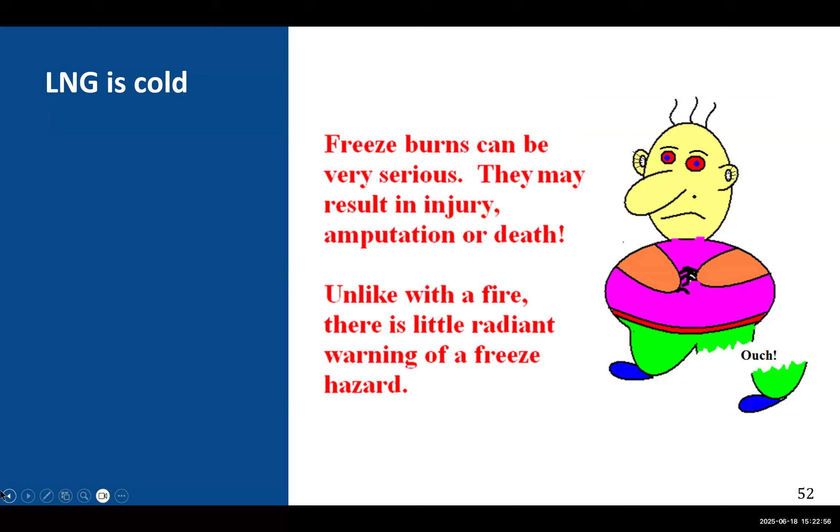I know of one person who did die from it, in I think it was Algeria, a foreign country. What happened was a valve burst and all the product dumped onto the person, and he was killed by the cold exposure.

You can also be concerned about the cold weight caused by icing on your piping. Also, hypothermia - if you're in an area that's too cold, your body can experience hypothermia, where your body temperature drops significantly.

One of the major places where you get hypothermia has nothing to do with LNG directly, but with working on an import or export terminal when a person falls into the water. In midwinter, that person is exposed to hypothermia.

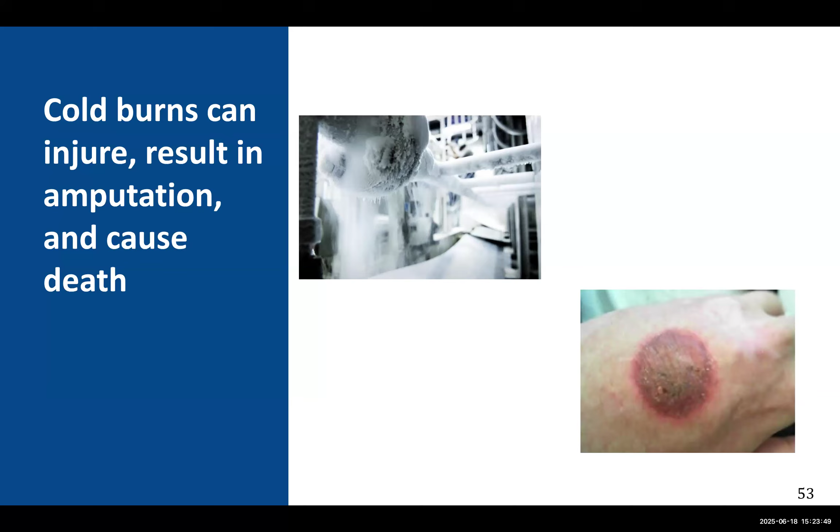The water's cold. They typically have a boat that's always in the water that can pick up anybody who's fallen. Anyone who's near the edge of the water has a harness on with a rope. So there are a lot of precautions, but it has happened where people have fallen into the water.

Let's talk about combustion. Let's take CH4, which is methane. There's one carbon atom and four hydrogen atoms. The hydrogen are the little blue guys there, and the carbon's the black one in the middle.

Now it meets up with two oxygen molecules - O2 and O2. And what happens is it produces CO2 and 2H2O. So the products of combustion are CO2 and water vapor.

In some of the vaporizers, the water bath vaporizers, the products of combustion are bubbled up through the water, and the water level inside keeps increasing, and it overflows, and you have to treat that water because it becomes acidic. Why does it become acidic? CO2 and water gives you carbonic acid. The two form, and you have to treat that water to get rid of it.

But what I'm trying to point out here is that CH4 and 2O2 gives you CO2 and H2O. Let's say I have a fire in progress. How do I stop that fire? Remember, we have three things: we either eliminate the oxygen, eliminate the heat, or eliminate the fuel.

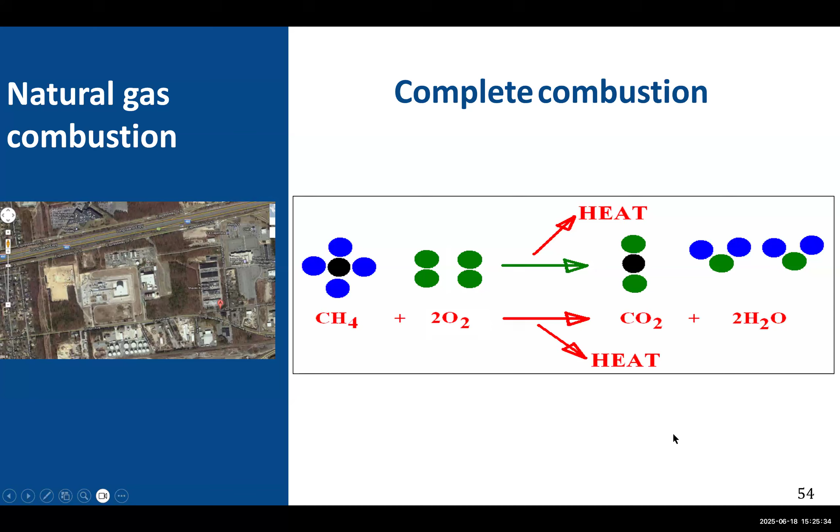One way to stop, we shut the gas off. Another way to stop it would be to stop this heat transfer. Keep in mind, this heat transfer is what ignites the next set of molecules sitting over here, and that heat given off is what ignites the next set of molecules.

So one way you can do that is if you have enough purge gas in the way. Let's say I put enough purge gas in this vessel, and although I have gas in the room - let's say I'm in a room right now with 3% gas in the room, gas and air - and I strike a match, nothing's going to happen. The flame will not propagate.

Why? It's too lean, I'm in the 3% range. I'm down here, this is the room with no gas in it. As I add gas to the room, I'm getting less oxygen in the room. I get to a point where I'm at the lower explosive limit of that mixture. So at the lower explosive limit, if I light a match, boom, I get an explosion.

All the way through here, I'm up at 10% gas and air. That's about the stoichiometric mixture for gas and air. Up here, I'm at 15% gas and air, somewhere a little bit higher than 15%. I could still strike a match and boom, there'd be an explosion.

Up here, I'm at 17% gas and air. Strike a match, nothing happens. Why? There's too much fuel. Now that sounds a little contradictory - too much fuel. Well, what is the fuel? The fuel is an insulator. It insulates that heat from being transferred to the next set of molecules that are ready to combust. In the same way, there's too much air in this room for the heat to transfer from that first set of molecules to the next set, so the flame does not propagate.

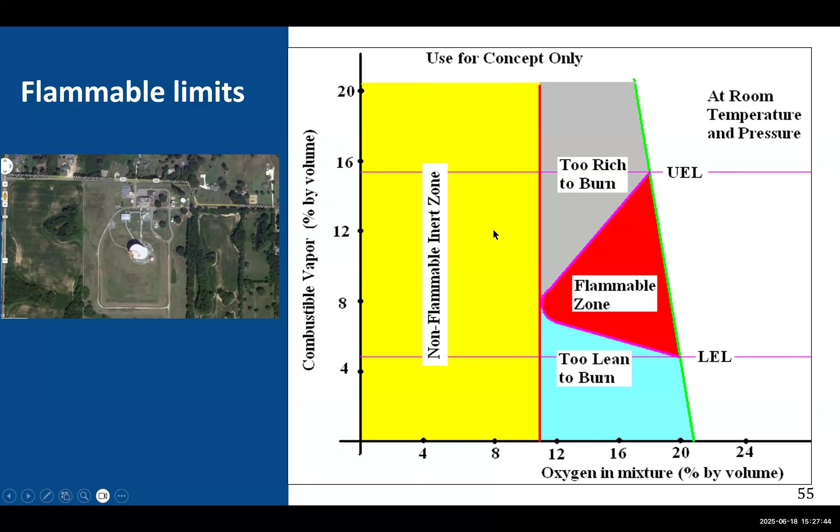But anywhere within this red zone is a flammable zone. So let's say I have a vessel, a large vessel, let's say it's an LNG tank, and I want to bring it down, I want to purge it out. So I bring it down to 9% oxygen, 9.5%. Typically they bring it down to 9.5% oxygen. So I'm here at 9.5% oxygen, and as I add fuel to that tank, I never go through the combustible zone, and therefore I never have any concern about combustion.

This is what actually happens here. I just added enough nitrogen, 9.5%, and then as I added gas to it, followed this path, never got into the flammable zone. And that's how you purge out. That's how you would gas in a tank.

Now here I went up to - this is combustible vapor. Here I went all the way up to 100% gas in the tank, and the tank is ready to be brought into service. Now, you always bring an LNG tank into service by product purging it, bringing gas into it before you bring LNG into it.

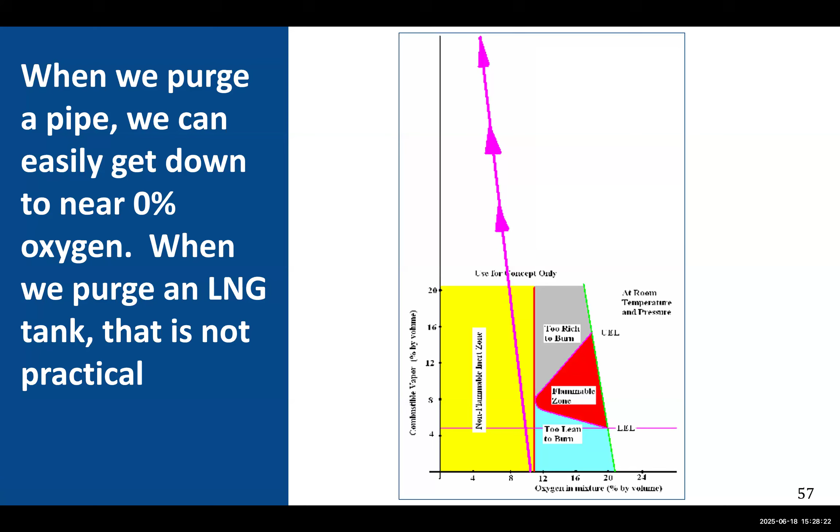Deflagration and detonation. Deflagration is a slow fire that burns at below the speed of sound. So you can light the fire, like I said to you, if you had a pool here and this long cloud of vapor going off, you light that vapor, and the flame travels back to the pool of liquid.

That's a deflagration. A detonation is where you have, let's say, gas and air in a room. It's a confined space. You light it, bada boom, you have an explosion. Or if you add a lot of turbulence to the fuel mixture, you can end up with a detonation because your flame front has a large surface area.

In fact, I did my PhD dissertation on flame propagation within internal combustion engines using methane as a fuel. A lot of it had to do with how much tumble and how much swirl you put into the combustion chamber - those are different types of turbulence. If you do it high enough, you'll get a detonation. Do it just perfectly right, you get the right level of deflagration, and that's what you want in a combustion engine.

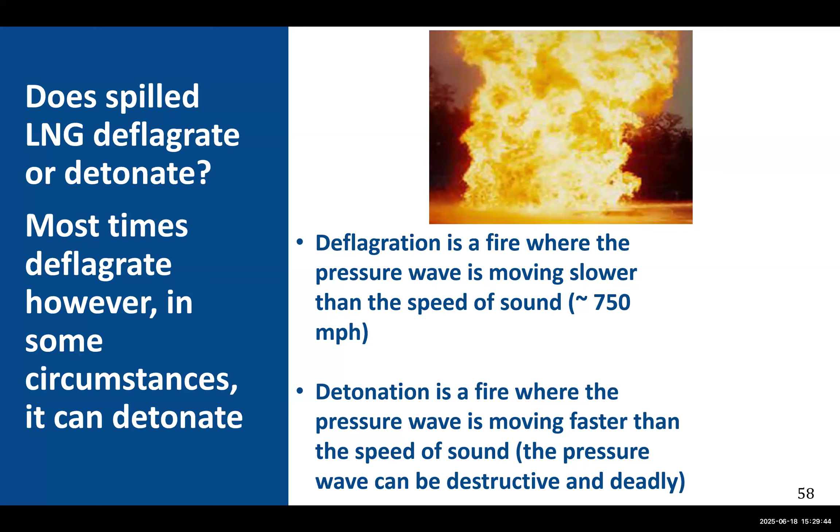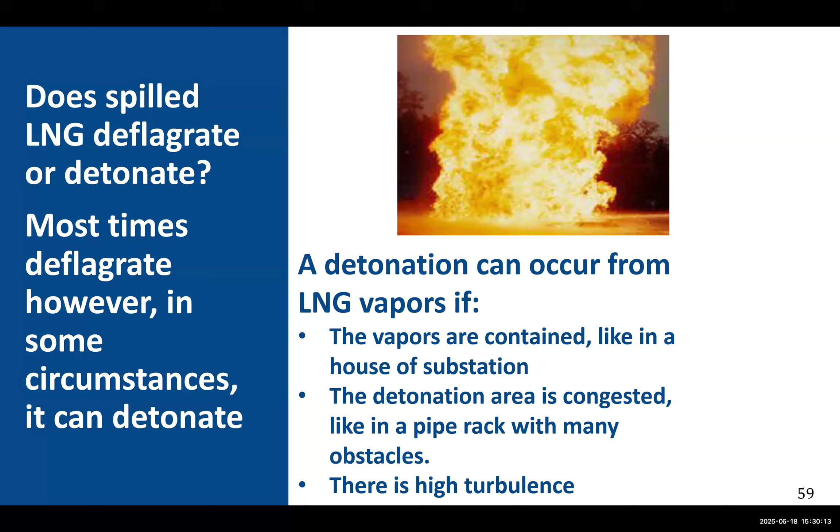A detonation can occur from LNG vapor if the vapors are contained, like in a house or a substation. A detonation can occur in a very crowded pipe rack - if as the flame occurs, all that gas is being pushed around pipes and you get a lot of turbulence, you can get what's called a deflagration to detonation occurrence. So it starts out as a deflagration and then it degrades further and becomes a detonation.

Now, this is the Skikda plant in Algeria. This was called a deflagration, but it sure as heck looks to me like it was a detonation. Originally what happened is MR, which is mixed refrigerant, leaked into the inlet air of a boiler.

The boiler overheated and exploded, which took out some piping carrying gas, leading to follow-on pipes exploding. I have to be careful with the word exploded, because explosion implies detonation. The boiler exploded, breaking other pipes. They declared this a deflagration, but when the boiler exploded, I have a hard time calling that a deflagration, because the boiler is literally a steam boiler. So that breaking of the boiler by overpressure could have been an initial detonation. But this is the end result.

Why would this not happen here today in the United States? Because we require that every boiler, at the intake, have a gas detector tied into an automatic shutdown. This plant did not have that. Should it have had it? Probably. It was one of those things that wasn't required when the plant was first built. It was required after the fact, and it was probably on the punch list to get done sometime in the future.

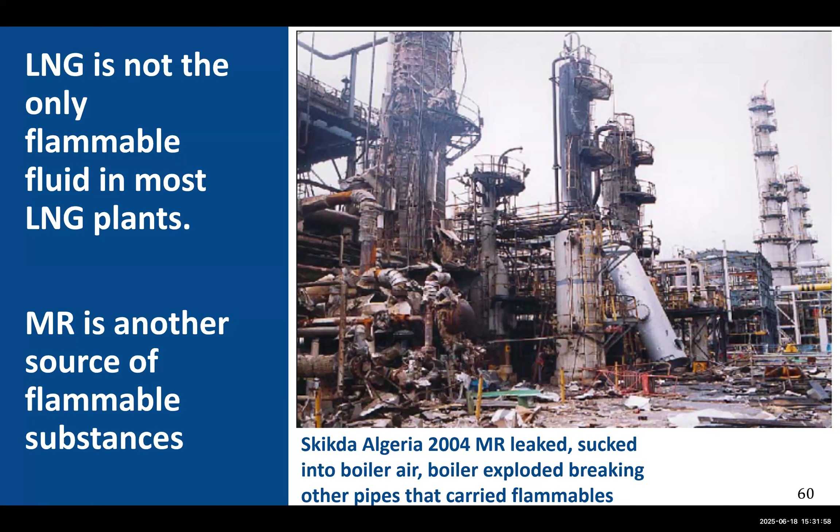They have a lot of what's called MOC, management of change, changes that need to be made to the plant. Keeping up with your MOC is important. This might have been on the MOC list. Obviously, it wasn't done. Now, this appears to be a detonation.

I took this off the internet, and what you find on the internet, whether it's true or fictional, I don't know. But I took this because it shows pretty clearly what happens in a detonation. I want to play it here so I can switch to the other slide without losing my connection. Now, playing it, you're going to see an explosion take place.

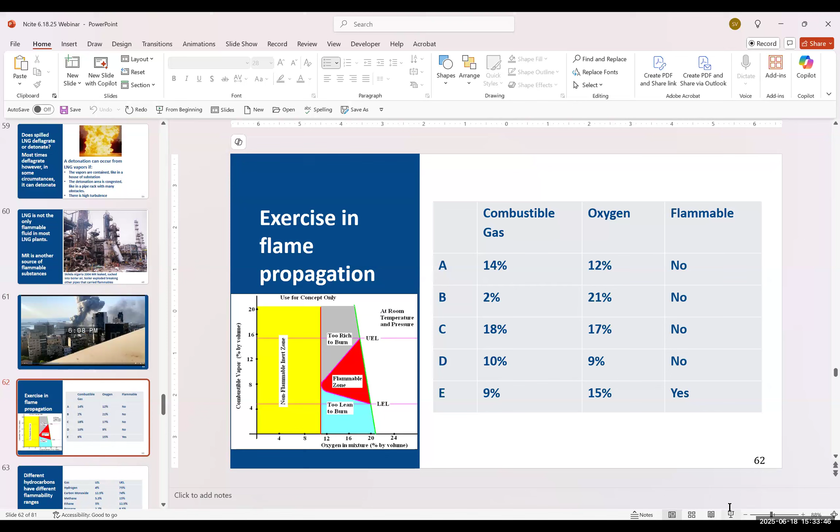Okay, let me go to the next slide. Let's see if I can get big screen again. So what happens with a detonation, you get that shock wave. If you look at war movies and see bombs dropping, you see a small explosion from the plane's view, then you see this wave that goes way out past the explosion. That's a shock wave, and that's what causes death and destruction. If you experience a shock wave of more than 1 psi, that's pretty detrimental to internal organs. Once you go above 1 psi, the lungs, liver, etc., get that bam effect, and that can certainly kill you. You don't have to get hit by shrapnel, the detonation alone can do it.

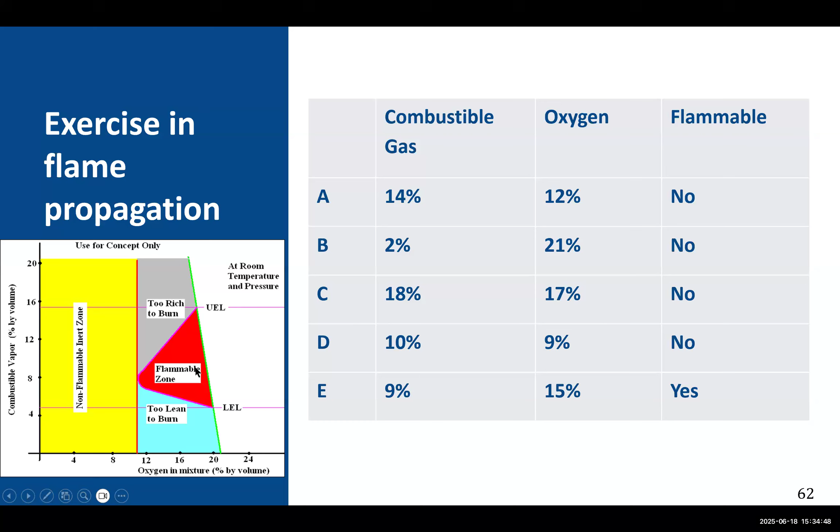This just shows you some oxygen contents, and we've gone over what they would be and when they would be. So this is something you look at and understand: the only place you're going to get that fire is when you're in the flammable range. Now, let's talk about flammability range. The two fuels that concern me the most are hydrogen and acetylene.

I've experienced explosions of both of these. Hydrogen, when I was a kid, I was trying to do welding. I didn't know how to weld, I just saw it and thought it sounded fascinating. So I got a bunch of lead acid car batteries, put them together, got a piece of steel and a coat hanger, and kept making an arc trying to weld. Eventually the batteries were discharging and started producing hydrogen. The hydrogen ignited and blew the battery up. I got acid sprayed in my face, and fortunately the batteries were dead enough that I was able to survive. I tried to run into the house but ran into the brick wall because I couldn't open my eyes. Eventually I found the door, found the sink, got my face washed off, and got in trouble afterwards.

And acetylene happened on a job where I had two workers working, and they put the acetylene torch inside the cabinet on the side of the truck, and left the valve on the tank open. This was their own way of operating.

They had made a hole in the side of the truck, had the acetylene tank in the open part of the truck, and then had the hose go into the closed cabinet and rolled up the hose, put it in there, slightly leaking. As the person was grinding the pipe, a spark went by the door of the truck and blew the side cabinet right off the truck.

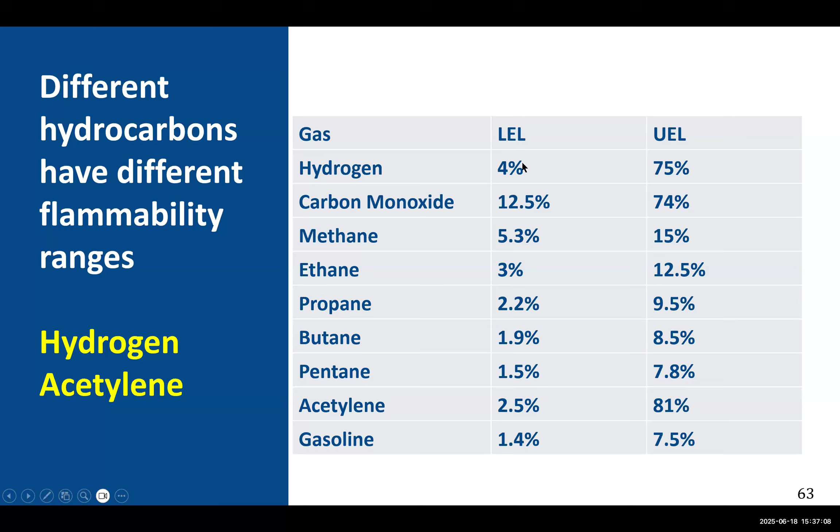It certainly gave me a realization of how serious acetylene can be. A very, very wide range of flammability. Now, natural gas, remember we said was 5% to 15%. This is 2.5 to 81. This is 4 to 75. Very wide range of flammability.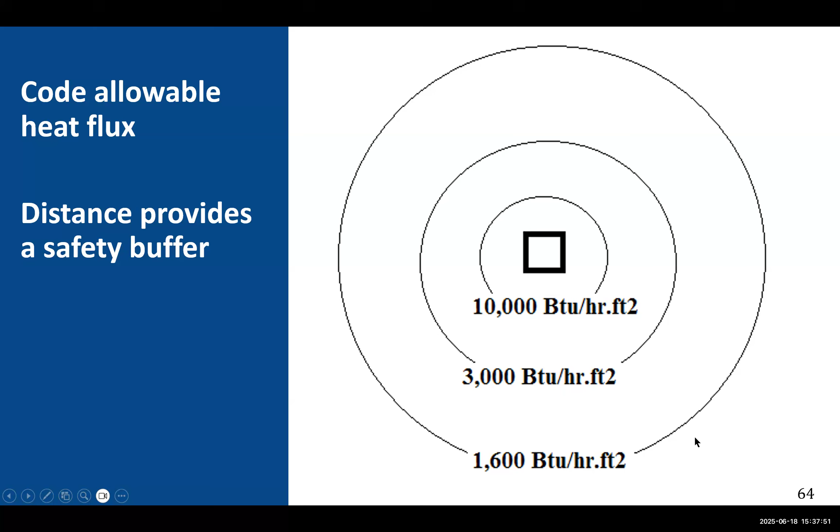Keep in mind what I said about the wind. This does not take into account the wind. So in the ideal world, all flames point straight up, and all flames have isopleths that can be calculated living in the real world. And we're not — the picture you see is not the real world. The picture you see is done by calculation.

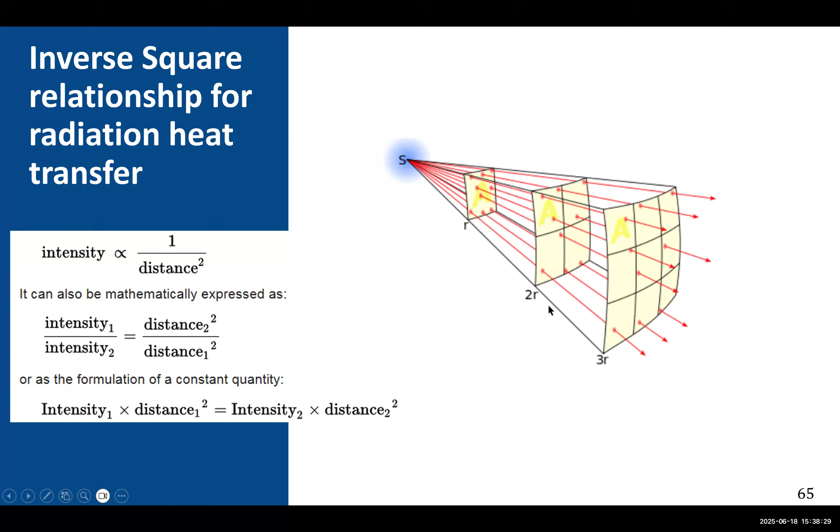Radiation decreases to the squared power by distance. So here you have a radiation value of, let's say, 1, here it's 1/4, here it's 1/9. So the further you get away from a flame source, the better, and it's not a linear relationship. You get twice as far, you only get 1/4 of the radiation, 3 times as far, 1/9 of the radiation. So distance is your friend to radiation heat transfer.

But what can radiation heat transfer do? Now, what's not taken into account — you remember seeing that explosion in the petrochemical plant? It does not take into account the initial explosion, all the debris and shrapnel that comes off that explosion, does not take into account the initial gas release. It takes into account only the steady state release of gas, the steady state.

So if you have, let's say, a pipe explode on the ground, it ruptures — it's not taking into account the rupture. Made a crater that was 65 feet wide, 140 feet long, 14 feet deep. So it doesn't take into account all the debris that was blown out of the ground or the initial blast. It only takes into account the steady state flow of gas.

So this is from the GRI report that talks about where a lot of the rulemaking was made. It talks about the steady state flow of gas and the radiation related to that, the heat radiation.

So this is 1600, and in 30 seconds you're at the threshold of burn. This is 2000, and here you're at the threshold of blistering. 3,000, let's go down to 5,000, 30-second exposure — you're at the point of 1% mortality. This doesn't mean that only 1% of the people were hurt. It means everybody got burned, but 1% of them were burned bad enough that they died.

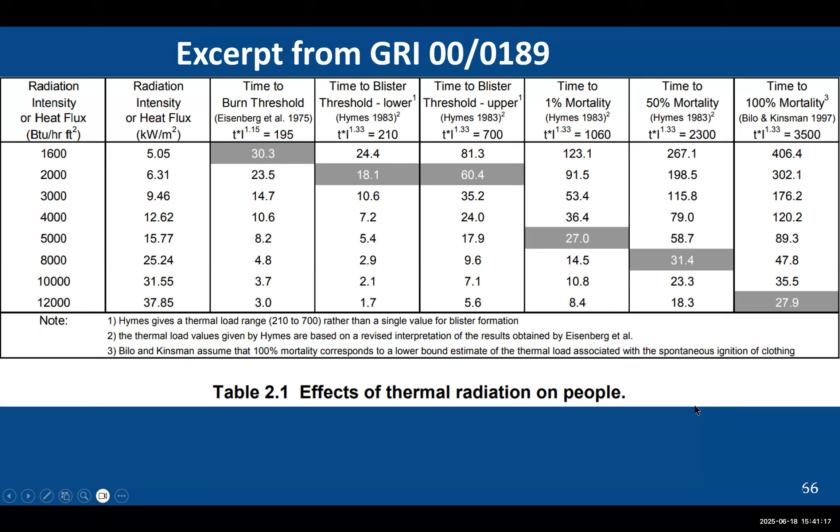Now, if you go to 8,000 BTUs per hour per square foot, this increases to 50% mortality for a 30-second exposure. If you go to 12,000 BTU per hour per foot squared, in 30 seconds you get 100% mortality with spontaneous combustion of the clothing. So these people didn't get to a shelter, and 100% of them died — they may never have gotten to a shelter. 30 seconds of exposure, spontaneous combustion of the clothing and severe burns and death. 100% mortality. So here's just that plotted on a graph.

So let's say I want to place an LNG facility on a site. So I got this great idea — I happen to have a couple hundred million dollars and I want to invest it. And I said, I'll make an LNG plant.

I'm going to put it here in this location. Well, I'm certainly not going to put it in New York City, because it's not allowed in New York City.

In New York City in 1973, 40 workers were killed in an LNG tank, and it was deemed an industrial explosion. They were working in an LNG tank, a full containment tank. They had a deflagration inside the tank, it pressurized inside the tank, and the concrete roof raised up and then collapsed in on the workers.

Now the tank had not seen a drop of LNG. It had been purged out for 10 months prior to this event. And what happened is, you saw the tanks I showed you earlier - those were about 3 miles away, the tanks that never stored a drop of LNG.

So the tank that blew up, of course, they took out of service. They bulldozed the place - you drive past it today, it doesn't look like the tank was ever there. The tanks that were 3 miles away, they withdrew their operating permit from those tanks.

And so LNG was banned in New York State from 73 or 74 up until it wasn't until 2015 that they put in place rules that allowed the building of LNG facilities in New York State, but not in New York City. In New York City you cannot even transport LNG. Not that LNG is not safe, but it's got a perception of having issues.

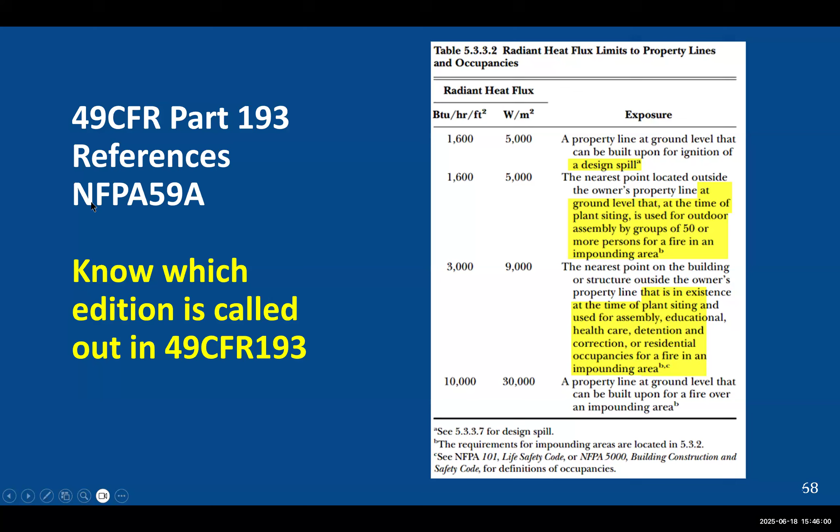This is the code, and you have to know which code to apply. NFPA 59A has no teeth in it other than the fact that 49 CFR Part 193, the federal code, dictates that you have to abide by 59A, but with certain additions. You have to abide by the 2001 edition of 59A for certain parts of the code, and the 2006 edition for other parts. So knowing which parts gets very... I want to get down to some examples.

These are two single containment tanks. You can see they're single containment by the fact that they have the berm around them. Single containment has a small impound area - this is for a spill. And you see this little green thing here, it's a water pump. You don't want to have water in this area, so if it rains, you pump the water out of the impound area.

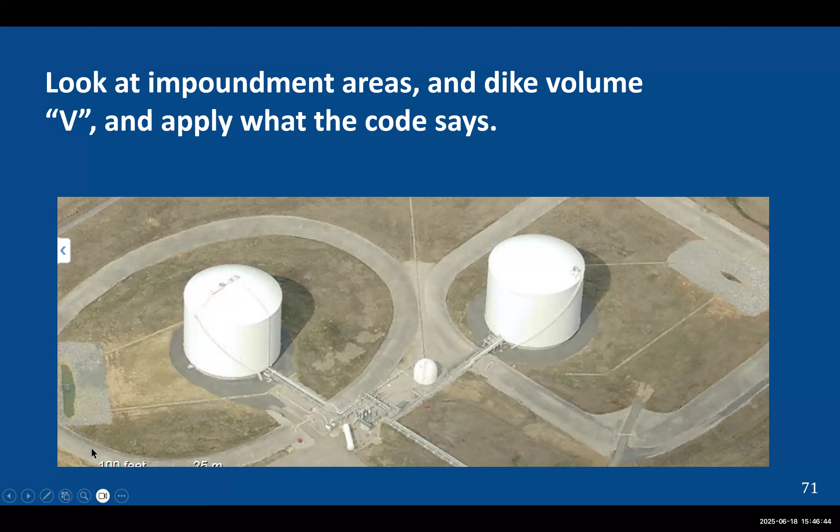And if you have a design spill, that spill would come down and collect over here, and you could have a fire in this small impound area. If you have a full dike spill, well, this entire dike would fill up with LNG, and you get a considerable amount of vapor production.

But as you can see, there's not too much requirement on the design spill. The codes I mentioned, and you got to be careful, because many of these codes within 193 reference many other codes, including NFPA 59A. If you read NFPA 59A, you'll find numerous other codes included in there. So let's look at vapor concentration.

This is another requirement. This part of the code, which is part of 59A, required by 193, says that the spacing of LNG tank impoundments to property line that can be built upon must be such that...

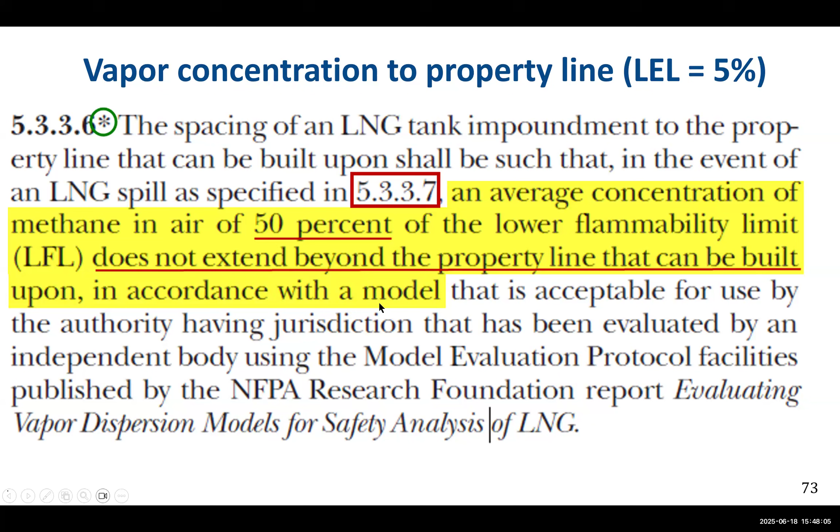In the event of an LNG spill as specified in 5.3.3.7 - that's the design spill - an average concentration of methane at 50% of the lower flammability limit, that's 50% of the LFL or LEL, they mean the same thing, does not extend beyond the property line that can be built upon, in accordance with a model. And they tell you what model to use for doing that calculation.

So this is very interesting here. Based on thermal radiation, can this plant be built if this is an isopleth for a design spill? That's the design spill, not the full dike spill, but a design spill. And if these are my isopleths, the answer is maybe. Now, how do you say maybe?

1,600 BTU is outside the property line. The question is, can this be built upon? Is this an island with nothing but water around it that can't be built upon? Is this all wetlands?

Then it's really up to the authority having jurisdiction, the AHJ. If they don't want you there, you're not going to build that, period, regardless of what the code says. But they can determine, well, this is an island, so you're okay, you can build here. Or they might say, no, you can't build here. Even if your isopleth was inside here, if they say no, you're not going to build. Like in New York City, you're not going to build an LNG plant regardless of how much buffer zone you have.

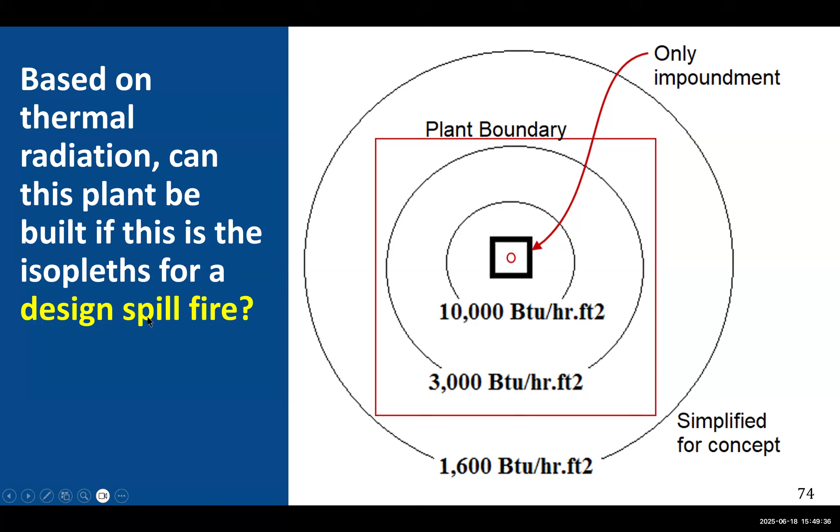Let's see if I can get to the next slide. Here's the next one. It says, based on thermal radiation, can this plant be built on if this is an isopleth for design spill fire? I think that's the one we just did. And this one's the next one.

Now we're talking about, based on thermal radiation, can this plant be built upon if these are isopleths for a full dike impoundment fire? For a full dike impoundment fire, what is required? Totally different. Remember, for a full dike impoundment fire, the rules are totally different. Let me see if I can grab those rules. I have them here. Here they are.

You are allowed to have 1,600 BTUs at the nearest point located outside the owner's property line at ground level, at the time of siting, used for outdoor assembly. Well, it really is at the time of siting. If there's no outdoor assembly here, you can build this - 1,600 BTUs.

It is required that is in existence at the plant site at the time of plant siting and is used for assembly, education, healthcare, detention, correction, residential. 3,000 was all within the property line, so that one doesn't count. So this can be built, this can be built, if there's no place of public assembly at the time of siting.

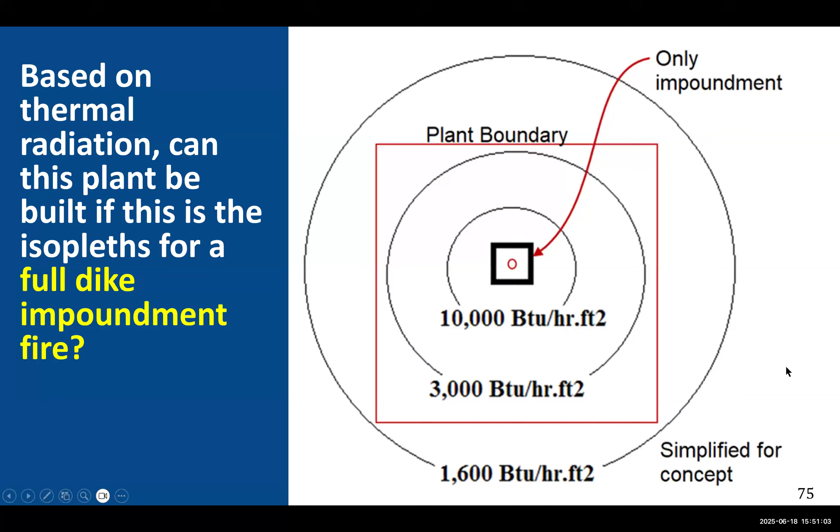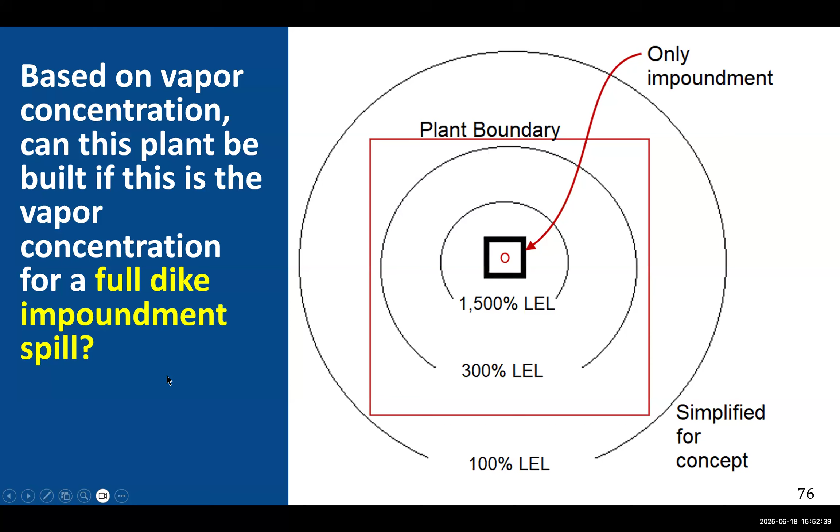It's so unlikely that the code is just silent on it. So if this were a design spill, I'd say no, you cannot build this. But if it's a full dike impoundment spill, there's nothing - this does not stop you. This particular set of isopleths does not stop you from building because it's a full dike impoundment spill and the code is silent on that. So now let's say this is for a design spill. In this case, your 50% LEL is within your property line. Yes, you can build this.

So public and political opinion can be a stronger reason than technical reasons for not building. Think about what happened to the Shoreham nuclear power plant and to the Distrigas tanks in Staten Island. Those are the ones I showed you earlier that never saw a drop of LNG. Public opposition pushed political opposition, which shut those facilities down.

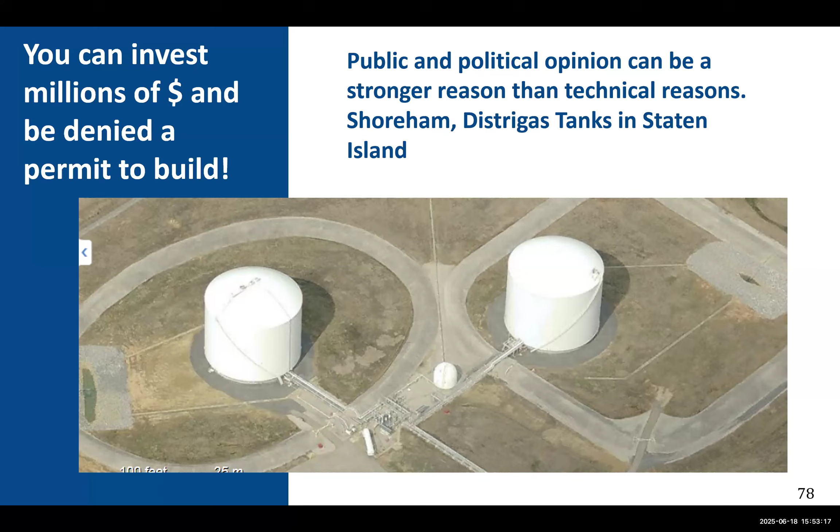Now, the one thing we did not talk about is LNG is transported by truck. There are tens of thousands of LNG trucks that cross all over the country except New York City. That's the only place that I know of where they're not allowed to travel. And all over the country, they're not allowed in tunnels, typically. I can't say every tunnel has that restriction, but I know they're not allowed in tunnels in general. That's a general rule. They're not allowed in enclosed parking garages for obvious reasons.

Now, LNG tanker trucks have to be vented down. Remember, it's nothing more than an insulated tank. And if you drive it a long distance, that mechanical work that goes into the fluid creates boil off and you have to vent it off. So that's part of the concern with an LNG tanker truck.

With an LNG ship, you also have boil off. Rather than vent it off, they typically feed it to the boilers so that they use it as fuel. That's one way, if it's a steam-driven engine. If it's diesel-driven, which most of the newer ones are, many of those have been converted to accept a certain portion of the LNG vapor along with the diesel fuel.

The diesel fuel is still needed to create ignition because LNG vapor will not reach combustion temperature due to compression in a diesel engine, but a small spray of oil will start the ignition and give you a flame propagation that you can run your diesel engine on natural gas. And that's why I like even natural gas vehicles, buses and trucks. You typically will have a certain amount of diesel fuel that's used for your pilot ignition, and then natural gas is aspirated into the inlet so that it can burn in the combustion chamber.